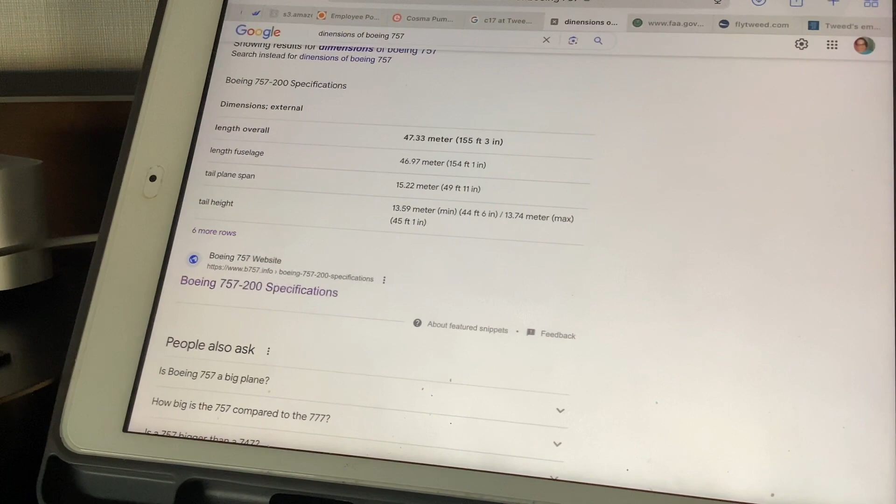And here are some basic numbers on a 757. Interestingly, the length of the airplane fuselage is similar to the length of the wingspan. They're in the neighborhood. I'll also say I'm using approximate numbers when we're talking airplanes because, frankly, there are many versions or variants of a given aircraft. And while it is intricately important in this discussion, overall, we're not making decisions today.

I'm not in charge of the airport. So talking in general terms, ballpark terms, is going to be the mantra of the day. So a 757 is clearly a big airplane, not just by its dimensions, but by its weight. And that weight for that given airplane is 220,000 pounds.

Something to keep in mind, a maximum certified weight of an airplane is just that. It does not mean that the airplane is always operating at that given weight. It means that it is certified to operate to that weight. So something very important right off the bat early in this discussion is the actual weight of the airplane at any given time. And that weight makes a determination in the aircraft performance, particularly from a runway standpoint.

But it will be important when we talk about airport design standards as weight of the airplane, not a determining factor, but an important factor and one to consider, but again, not a mandatory factor when talking about airport design, airport facilities, infrastructure, if you will. So again, the point is you have a 757 airplane that weighs potentially 220,000 pounds.

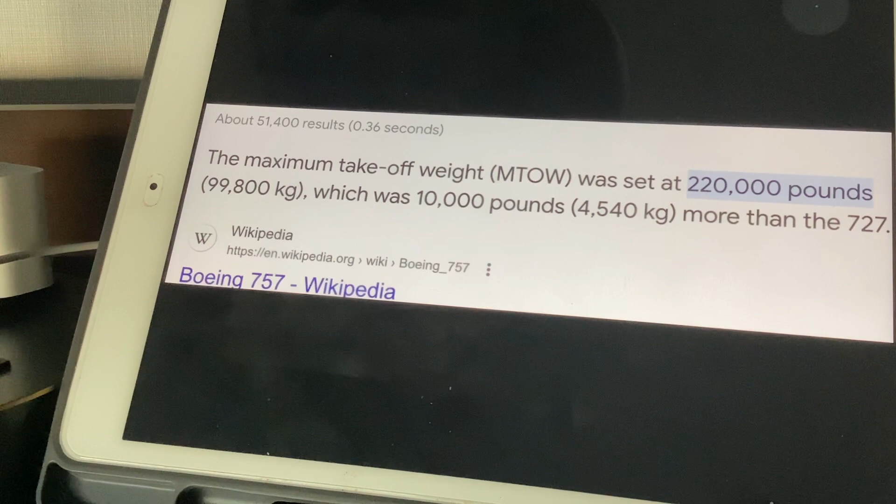One might ask, isn't that too heavy for the airport? Isn't it too heavy for the runway or the taxiways? Well, needless to say, it was there and nothing bad happened, so that's one indication. But we'll verify that with actual data and literature that I'll share in a moment. The C-17, here are the dimensions: 169-foot wingspan, 174 feet long. It clearly is a bigger airplane than the 757.

And the C-17 is certified, again, I'm just doing a general search, I'm not using the actual airplane flight manuals. It's certified to 585,000 pounds. Does that mean that's how much it weighed when it was at Tweed, for example? No, it doesn't. It's mission specific. It depends on what the airplane is carrying in terms of payload, passengers, cargo, and the large or lion's share of weight for an airplane is fuel.

And if an airplane is doing a short flight as opposed to long flight, it is generally going to be carrying less fuel, and therefore it will weigh substantially less than its maximum certified takeoff weight. So purely because we see numbers that indicate a maximum authorized takeoff weight does not mean the airplane was over the weight of a given parameter. We don't know what the weight of the airplane was. The crew does. Sometimes, and we'll talk about the circumstances, the airport operator will know about those things.

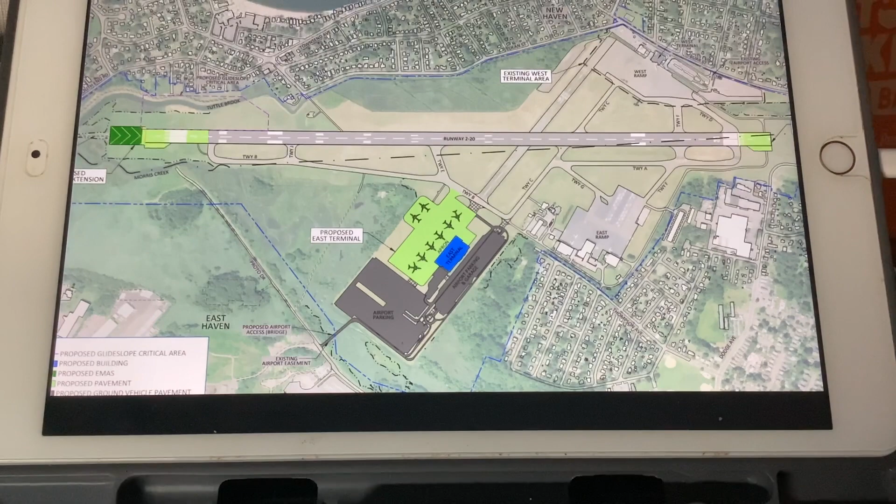But it also represents, essentially, what a pilot sees on his or her airport maps. Just note that you could come across different maps, different layout presentations, but the basic picture remains. There's going to be different information depending on who the audience is. In general you can assume this is what the airport looks like currently — well actually, this is a future rendition — but what engineers see is generally what pilots see for their documents, though often there are many differences.

But again, I just wanted to point out in the discussion about the geometry of the airport: clearly you see a runway, clearly you see taxiways. This is the runway, of course. And then you see, again, the geometry of the airport — that is, the angles of the given taxiways in reference to one another.

This happens to be taken from the Tweed New Haven Airport Master Plan. It's a rendition of the airport layout, and something that's very important: the ALP, or airport layout plan, is approved and reviewed by the FAA itself, the Federal Aviation Administration. It is not something simply produced by the airport.

It has to be approved by the FAA after the airport produces it, so the FAA will review what becomes known as the critical aircraft for that airport. They have specialists, airport planners, people who specialize in exactly this area of expertise, and they will approve or disapprove the airport layout for a given airport for a given critical aircraft.

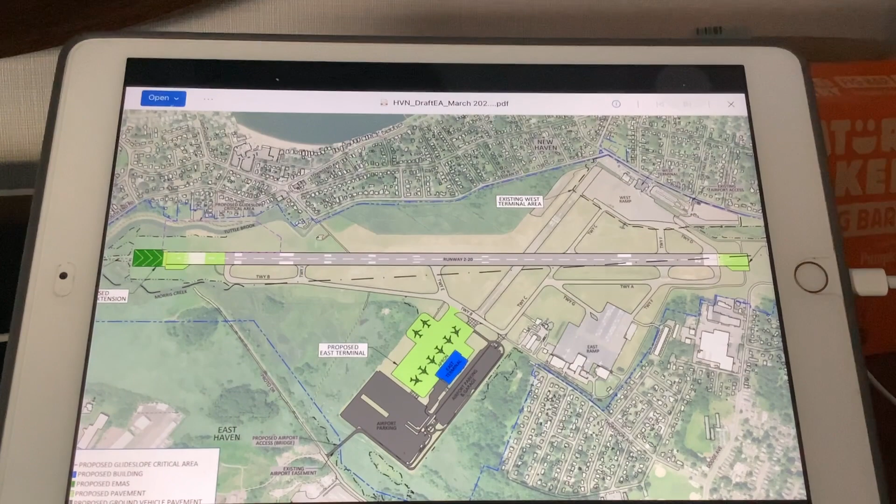The critical aircraft, which we'll define exactly in a moment, can simply be thought of as the most demanding aircraft expected to exceed 500 operations per year at a given airport. Simply, yes, you can say it's the biggest airplane you might see there, but not necessarily if we want to get technical. Overall, in the case of the critical aircraft for Tweed, defined as 500 or more operations per year, we are absolutely honing in on the Boeing 737.

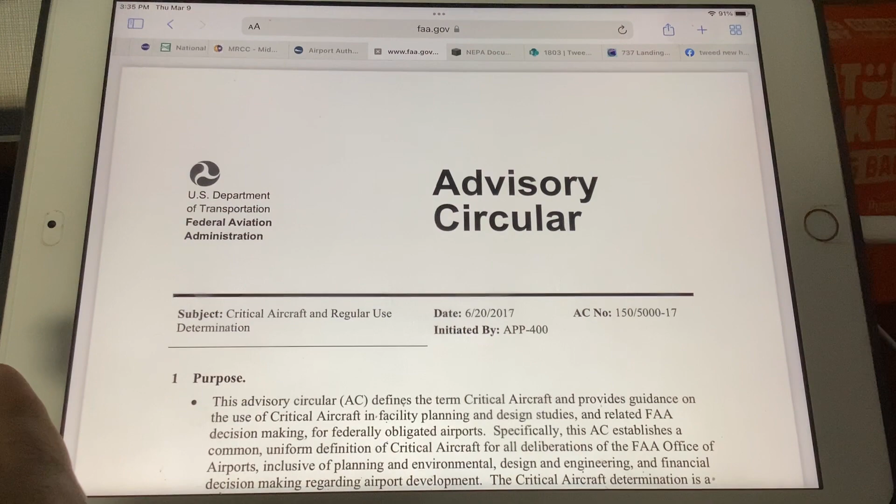So this airport layout has been reviewed and approved by the FAA. A document of great importance is Advisory Circular 150/5000-17, Critical Aircraft and Regular Use Determination. This is exactly the area we just discussed, and it's the document given consideration by the FAA, as it explains the process, part of what we're going to talk about. I will not reference much more than this document other than to say it can be found at faa.gov, and it is of great importance when one makes the statement, this airport was not meant to serve this size of aircraft. This is one of the guiding documents that answers that exact statement.

Critical aircraft and regular use determination. An additional document of great importance and relevance that once again addresses the statement that an airplane is too big for this airport, or that's the wrong airplane for the wrong runway, is document 150-5300-13 Bravo, Airport Design. Again, this is the document one would reference when making such statements or asking such questions.

And we'll ask questions. Is this airplane too big for this airport? This is where we find one of the many answers.

So getting on to definitions from these various documents, what is the purpose for making critical aircraft determinations? I'll paraphrase somewhat. It is an important aspect of airport planning and design for federally obligated airports. That means airports that receive money. It comes with a price. You follow our standards. Tweed is one of those airports.

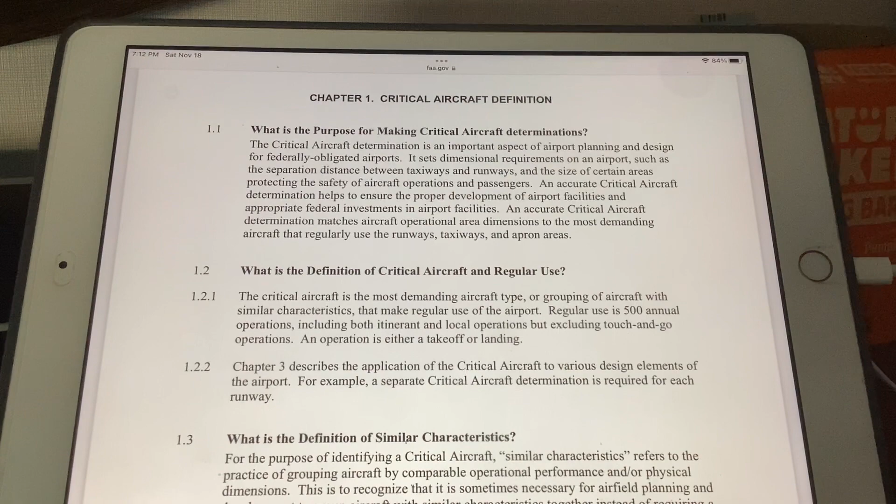Critical aircraft determination sets dimensional requirements on an airport, such as the separation distance between taxiways and runways, and the size of certain areas protecting the safety of aircraft operations and passengers. An accurate critical aircraft determination helps to ensure the proper development of airport facilities and appropriate federal investments in airport facilities. I'll also add, it does not just promote development, but it promotes the maintaining of these airport facilities.

An accurate critical aircraft determination matches aircraft operational area dimensions to the most demanding aircraft that regularly use the runways, taxiways, and apron areas. So yes, runways are important, taxiways are important, apron areas too, and we're going to talk about the interrelationship between all of them. These are things reviewed and under the purview of the FAA.

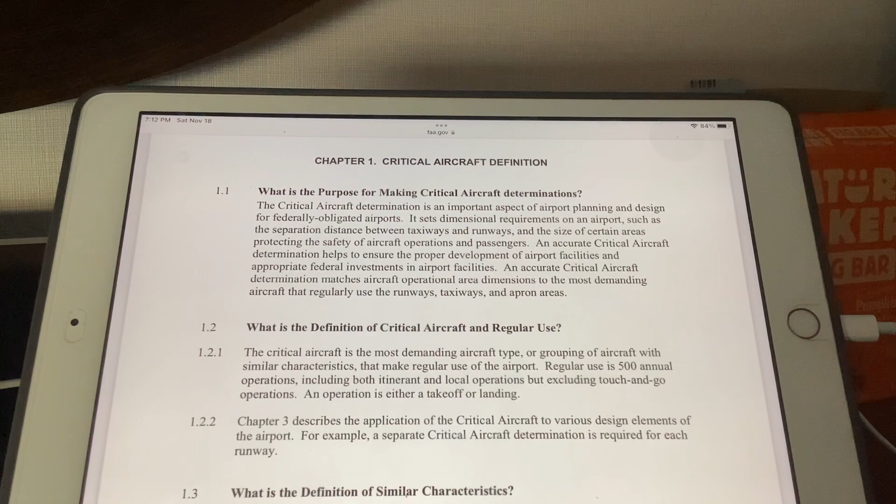What is the definition of a critical aircraft and regular use? Most demanding aircraft type or grouping with similar characteristics that make regular use of the airport. Regular use is 500 annual operations. I'll spare you the rest of the technical details, but an operation is either a takeoff or landing. And when we talk about air traffic control operations, that's an important number. For now, no need to explain touch and goes and things of that nature.

So we're using 500 annual operations of the aircraft as the benchmark. Anything under that, you could actually have an aircraft larger than is appropriate, for lack of a better statement. And you're protected by common sense and operational procedures of the crew, but simply you're statistically avoiding a range of circumstances that 500 or more would actually protect you from. So a way to think about that is combinations of aircraft. How many aircraft of a critical size could you have on the airport and still be within safety margins?

If you had an A380 land at Tweed New Haven Airport, it would actually, besides being very attention-getting, would be okay, because it happens very infrequently. And while the airport does not meet the standards for that airplane on a regular basis, it does in many other ways, and there are permissions granted for such things. That's the case of the 757s and the C-17s. But in this case, we're talking about regular use by a particular aircraft, and clearly 737s and A320s meet that benchmark.

Does the FAA's Office of Airports approve the critical aircraft determination?

Well, to answer this question is almost to end the discussion. We have a certain component of the public making statements that are unfounded, untrue, unsubstantiated, and frankly malicious, and they endanger the public, when in fact the regulating authority, the FAA—not saying they're perfect, by the way—but they are the ones in charge. They're in charge of this. They approve by what I'm about to read.

The answer is yes. ARP, that's a designation for the FAA's airport office, typically the ADO—again, another abbreviation for an FAA person or authority—will approve both the existing and future critical aircraft determination for an airport as submitted by the airport sponsor. During the planning process, this is normally done during the FAA's review of the forecast and documented in the forecast approval letter.

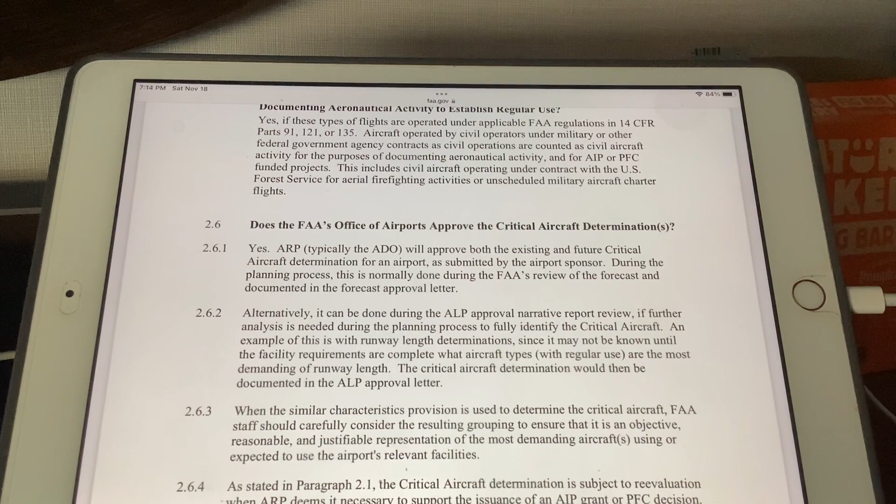I won't read the rest of this, but this is a very easy way of saying this isn't my word, this isn't the word of others, this is the word of the FAA. And while they are imperfect, they're the ones in charge, they're the ones with the authority and the expert knowledge to make these determinations. For this airport, Tweed New Haven Airport, to be functioning and regularly handling 737-700 and 800 aircraft, this beyond a shadow of a doubt says everything we're going to talk about has already been approved by the FAA, and it really isn't necessary. But in the interest of communicating and sharing information, we're going to.

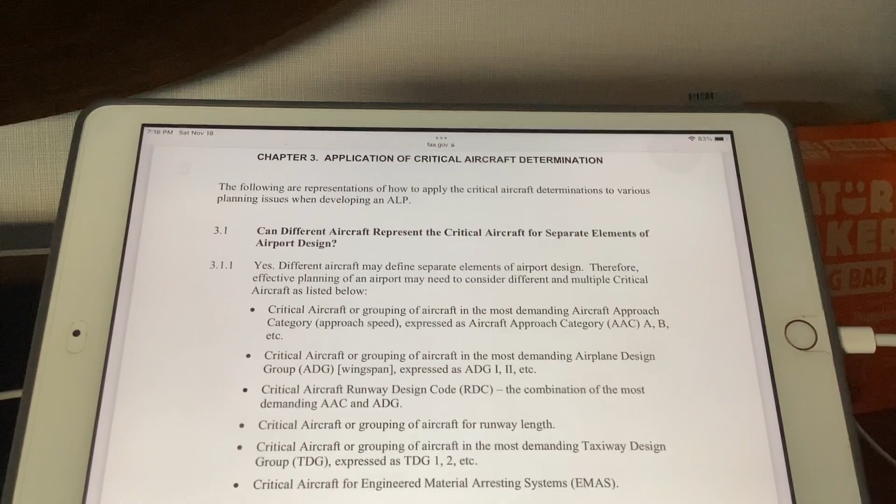Can different aircraft represent the critical aircraft for separate elements of airport design? What that's addressing is that certain parts of every airport may in fact not be suitable for a given aircraft. The reality is almost every airport has some variation of limitations imposed, and those limitations exist because certain segments of the airport are not sufficient for a given aircraft.

So I'll say that again, that's pretty impactful. Number one, this applies to countless airports that we all fly in and out of on a regular basis. Certain aspects of those airports are not suitable for the critical aircraft. Take any airline hub, for example—not using an exact case, just a general example—take Charlotte Douglas Airport, home to American Airlines. Obviously, the critical aircraft there is going to be something bigger than a 737.

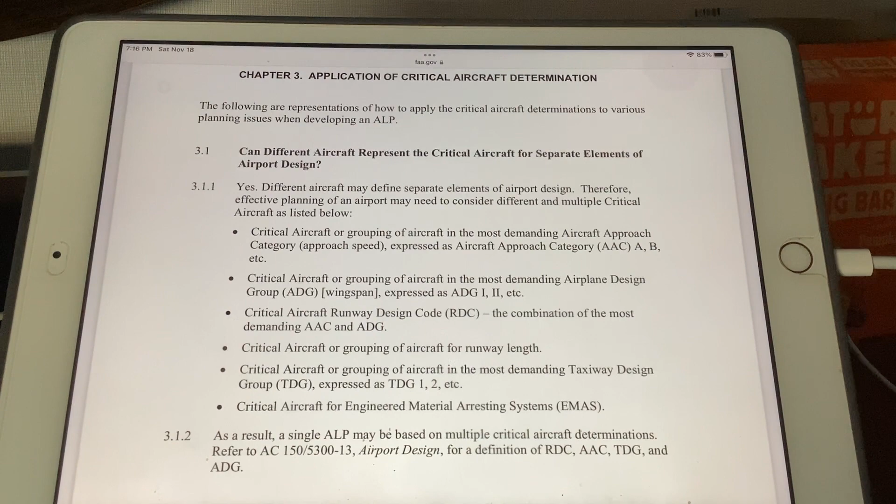It may in fact be the A330 series, or the 350, or 767 aircraft. Without looking at the proper literature, you may find—it wouldn't be a surprise—that certain areas of that airport have restrictions of use for the biggest airplane. I'll talk specifically about Tweed in a little bit about that very issue. That is not rare, it is common. As to why, that's a subject for another discussion. But it's common, it's known, and it's accommodated through proper amended procedures and other ways of doing business, if you will.

So that is a very broad discussion stating that certain elements of an airport may in fact not be suitable for a given aircraft, and there are ways to address that.

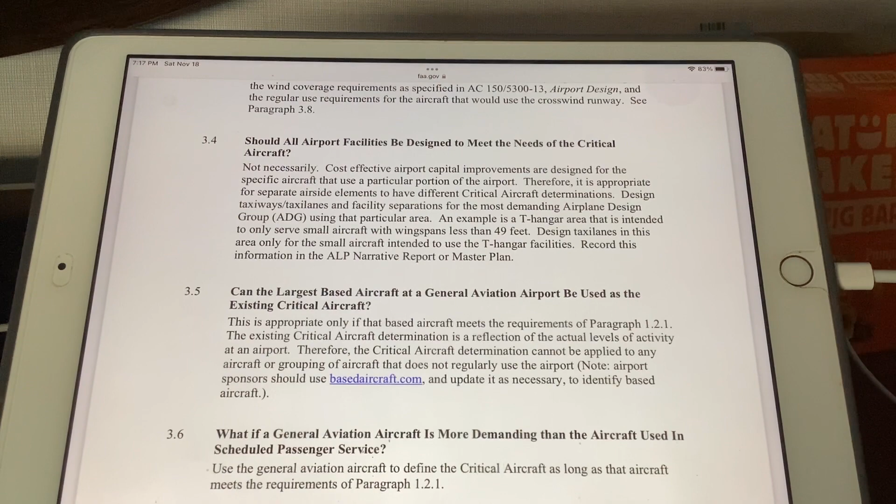Speaking of which, the next question—again, this is the FAA literature itself. For them to be asking these questions in a generalized document, not specific to Tweed but appropriate generally, must mean there are other conditions throughout the country that exist just as they do at Tweed. Should all airport facilities be designed to meet the needs of the critical aircraft?

Not necessarily. Cost-effective capital improvements are designed for the specific aircraft that use a particular portion of the airport. Therefore, it is appropriate for separate airside elements to have different critical aircraft determinations. Design taxiways, taxi lanes, and facility separations for the most demanding airplane design group using that particular area. I'm not going to read the rest of what they have.

I'll tell you—the east side of Tweed New Haven Airport, for example, has components, particularly the east ramp and what's called a taxi lane. There are limitations, though not many, and in fact you've actually seen 737s over there. But just by example, that side of the airport is not necessarily required to meet the critical design standards for a given aircraft. Does it? Yes, but with some limitations.

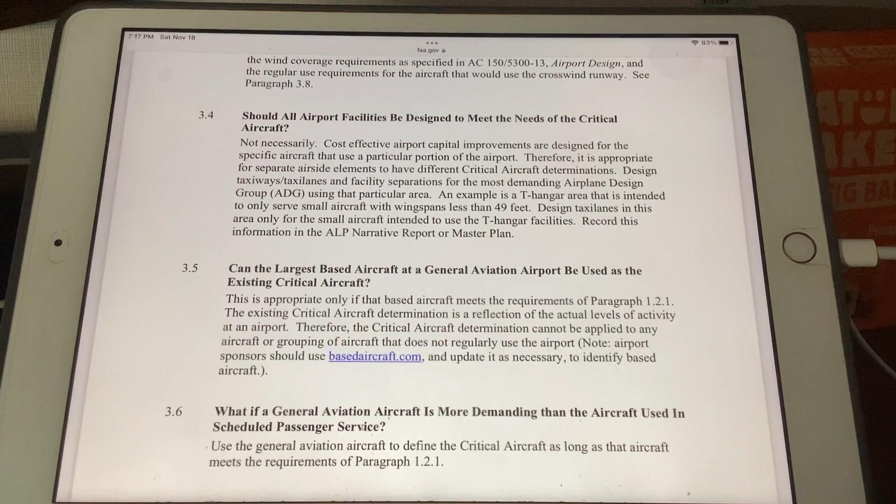So there's always a catch, there's always a caveat. It's a way of saying be careful if you wanted to generalize it, but there are issues with aircraft movement under their own power versus being towed, etc. But suffice it to say, an entire airport does not actually have to meet the standards for the critical aircraft. I'll say that again: the entirety of a given airport does not necessarily have to meet all the design standards for the critical aircraft. That's not my words, that's the words of the FAA. Does that mean that's necessarily the ultimate goal or will persist? No, but it means exactly what I stated.

Here's another important one, question 3.9. Should a critical aircraft determination be made for pavement strength design? Some in the airport opposition community tout runway weight-bearing capacity, and I'll get into that discussion in depth, but the simple answer is no.

The pavement standards don't have to meet the criteria for a critical aircraft. The methodology for designing pavements is different. Refer to the Advisory Circular entitled Airport Pavement Design and Evaluation. FAA pavement design considers the damage to the pavement from each individual aircraft in the traffic mixture. The final pavement thickness is based on the cumulative damage of all aircraft.

The important takeaway is that weight-bearing limitation is not something one should ignore. One should absolutely take it into consideration, but it is not a glaring safety oversight, very simply. I'm going to show you numbers and parameters that show Tweed New Haven Airport meets the standards for the given aircraft. I'll explain some technical details, but the bottom line is it does meet the standards, and I'll show you the numbers in a moment.

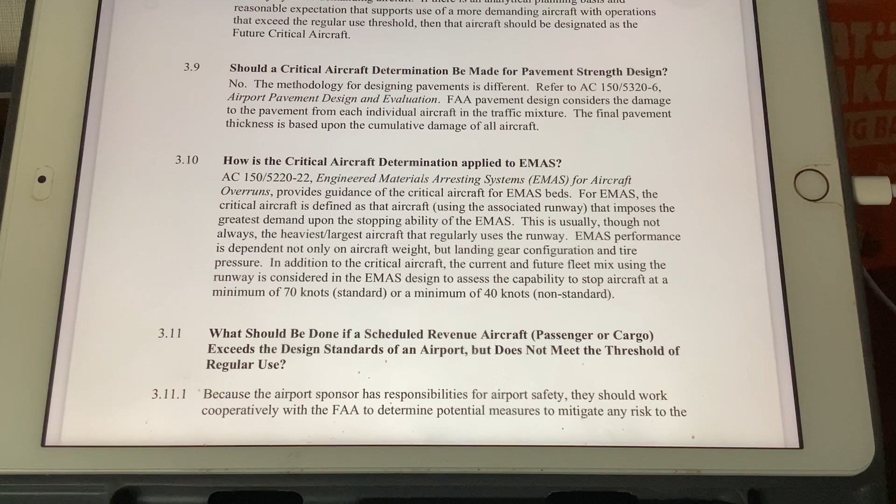If anyone were interested, the FAA's own literature says that weight-bearing capacity of a runway is actually not a limitation on the airport when determining critical aircraft.

We're almost done with these. How is the critical aircraft determination applied to runway length? Evaluate each runway separately at an airport. Choose the single aircraft or grouping of aircraft with similar operational requirements that have the longest runway length requirement and make regular use of the runway. In some cases, the critical aircraft for runway length may be different from the critical aircraft that establishes the most demanding runway design code for the runway.

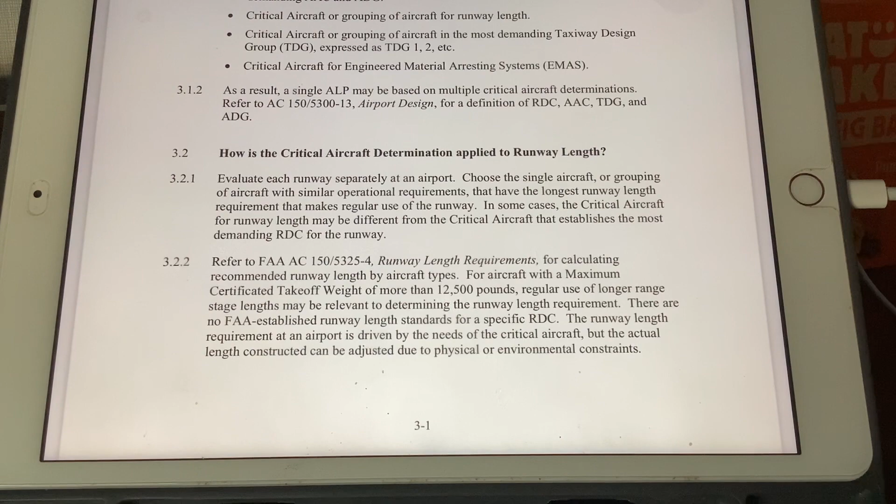Runway performance is a subject unto itself. I'll touch on it as I have in the past, but it deserves its own subject. At this point, runway performance is based on a number of factors for an airplane. It is not a static number, and I'll get more in depth on that. So runway length is not a determinant; aircraft performance is. Aircraft performance varies throughout different parameters and conditions.

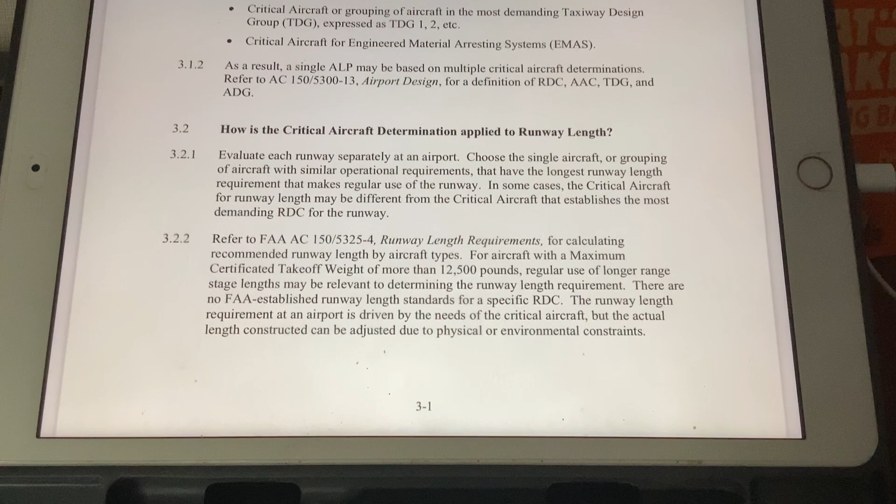An airplane could operate from a shorter runway depending on its mission, as opposed to a different day when it's doing a longer mission. Shorter missions typically equate to less fuel and less weight, whereas longer missions mean differently, so the parameters of aircraft performance are different. There's no static number past or below which it is unilaterally acceptable. You could operate a 767 from a 6,000-foot runway depending on the mission and the conditions in which it's operating. So you cannot use runway length as a static number, as many airport opponents like to do. I'll show you why, because they make performance charts for that very reason.

The airport layout plan, in the words of the FAA itself, is a graphic representation of existing facilities and proposed development plans for an airport. Airports that receive certain types of federal assistance accept a grant assurance that obligates them to maintain the current ALP. This tells you that this is a very important component to the particular airport.

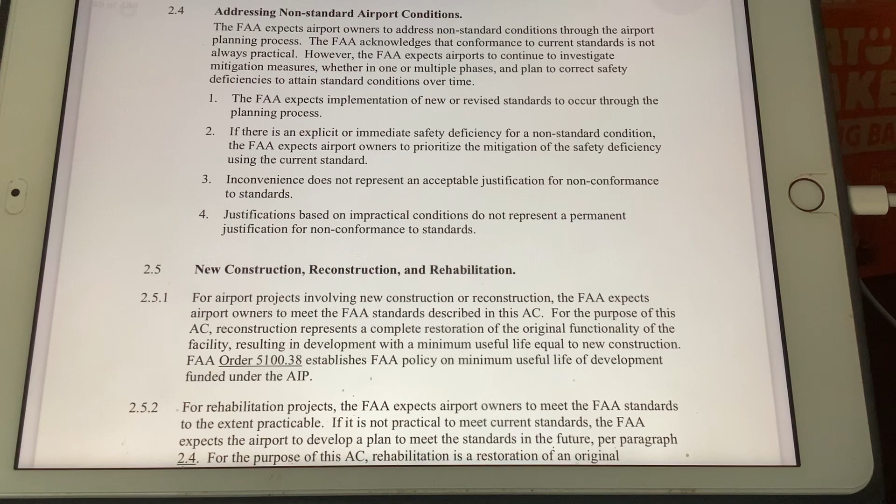I'll just see if there's anything of pertinence there. Then addressing non-standard airport conditions. I'm going to take a moment, let you look that over. Leave it here—you see everything that I thought was pertinent. This basically allows time to comply, and circumstances if compliance is not appropriate or could occur. But I'll leave it at that for a moment and let you just read this.

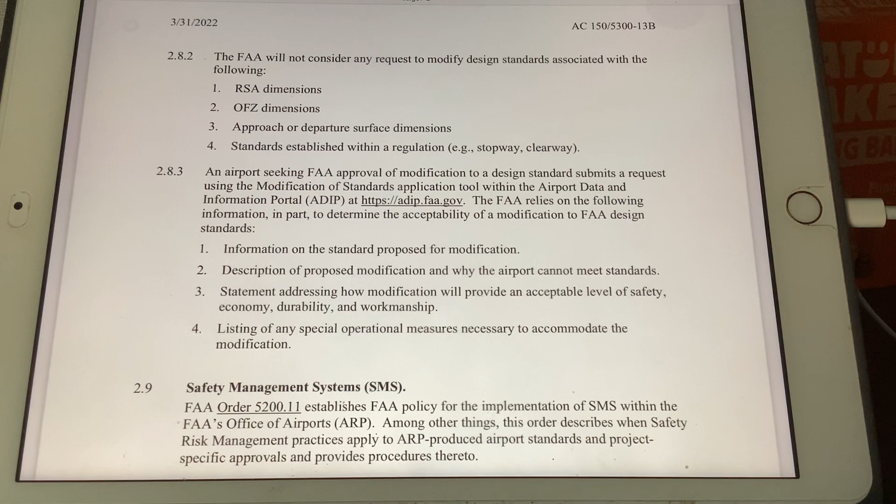So I have RSA dimensions, OFZ dimensions, approach or departure surface dimensions, and then stopways and clearways. This pertains to the slides we just read, but it allows modifications to the standards in the object-free areas, as we generally refer to them. An object-free area you could think of as a buffer area adjacent to the surface the aircraft is using, whether that's a runway or a taxiway.

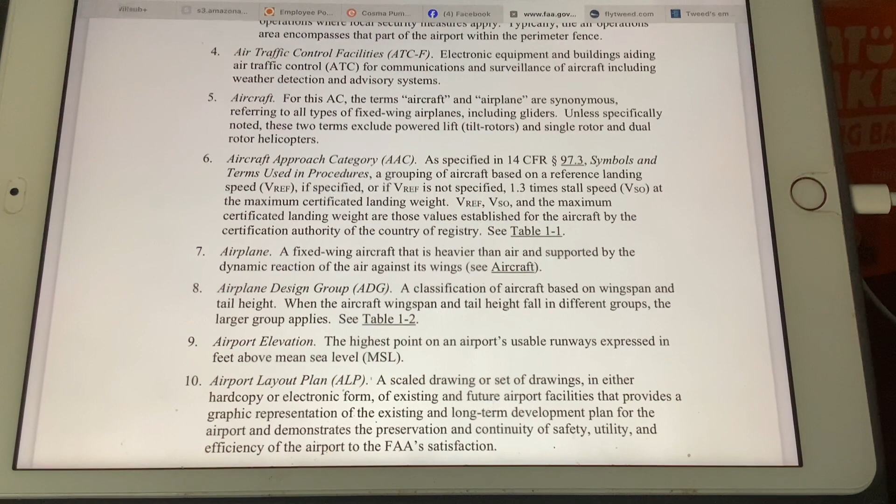We're almost done with the dry definitions, I promise. What we're going to get into is aircraft approach category and airplane design group. We've already talked about the airport layout plan, or ALP, but in this case we're going to hone in on the AAC and the ADG. Verbatim, the ADG, aircraft or airplane design group, is a classification of aircraft based on wingspan and tail height. I'll leave it at that. And aircraft approach category is the speed at which an airplane performs its landing approach when it's configured for landing. That's going to come into play here.

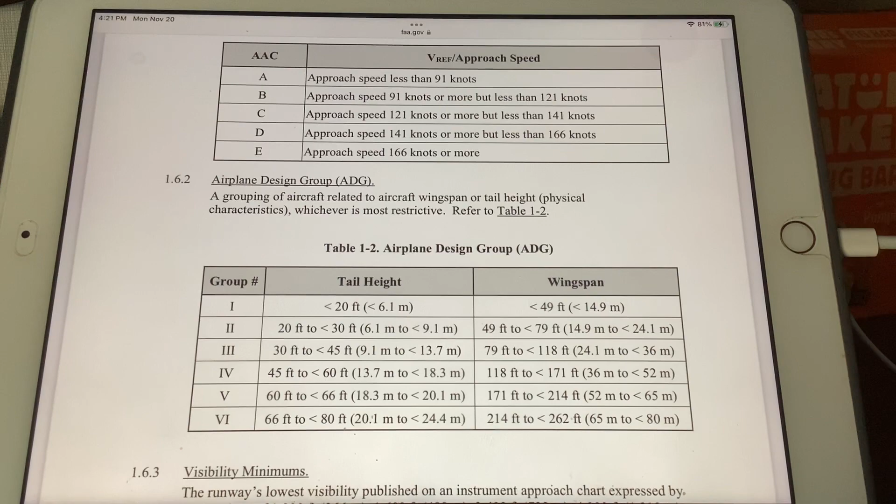Take my word for it, I'm experienced, authorized, and qualified to tell you that a 737, or the aircraft type that I fly, we utilize category C. So we're making our approach speeds between 121 and 141 knots. Those are typical speeds. Sometimes we might be in a different category based on certain conditions, but I'll spare you that discussion. 99% of the time, the 737, the Embraer 190, that category of airplane, an A319, are considered approach category C, C as in Charlie.

And further, we are all considered in a happy family of airplane design group 3. I'm not so concerned with tail height, we'll leave that out of the discussion, but the wingspan is 79 to less than 118 feet. I'm going to show you the specifications, the general numbers, for the airplanes.

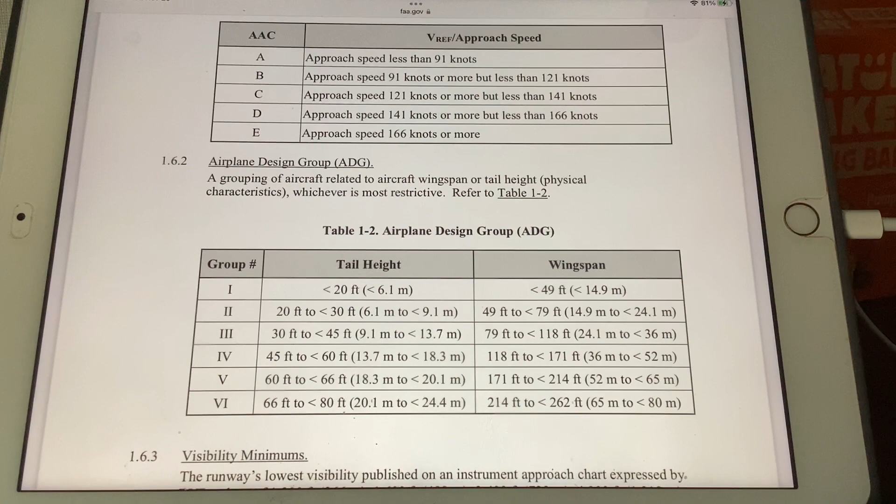Therefore, when it comes to the runway design group, we consider airplane approach category and airplane design group in order to get a runway design code, an RDC. So for now, we are C3. I'll add, and you can take my word for it, they add a 4-digit number which pertains to visibility. I'm going to spare us that right now, I'll show you on an approach chart where I'm getting that number. But as I said, the RDC, the runway design code, is a 3-component code sharing the AAC, ADG, and the approach visibility minimums, which establishes the design characteristics for a particular runway.

So I'm going to show you an actual chart that we use to land in poor weather conditions at Tweed, that shows we are appropriate for the given aircraft. Again, don't worry about the 1200 number, that pertains to visibility. And just like magic, there's the chart.

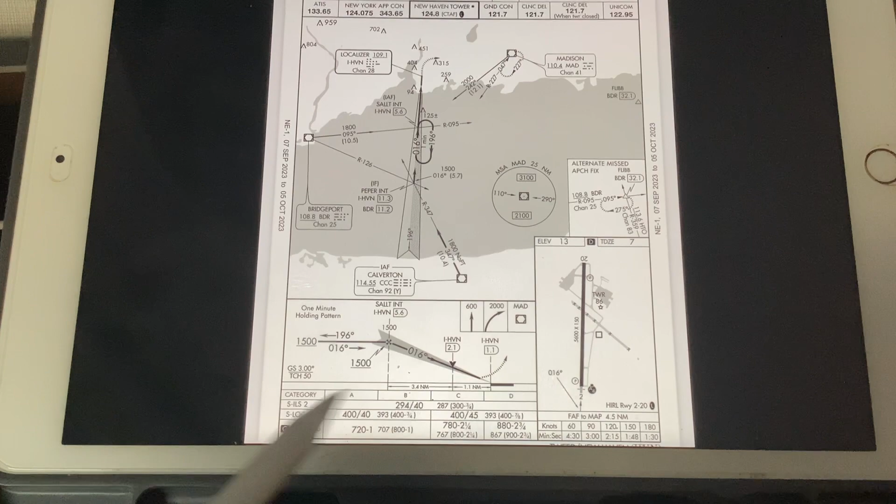If you focus on one area, I'm not going to teach you how to read this whole chart, it's not necessary. We have category A, B, C, and D. That's simply a way of saying if you're flying an airplane at a given speed, which pilots know - this is our aircraft, this is what we're trained for, this is what we have manuals for - we are category C. The way this chart works, since it's uniform across A through D, A being the slowest airplane, D being the fastest, means this approach, and the other approach Tweed has coming in from the north, will be the same way. It's approved for all categories of aircraft, any speed. In fact, if you wanted to fly a MiG-29 on this approach, you'd be allowed to, based on these minimums.

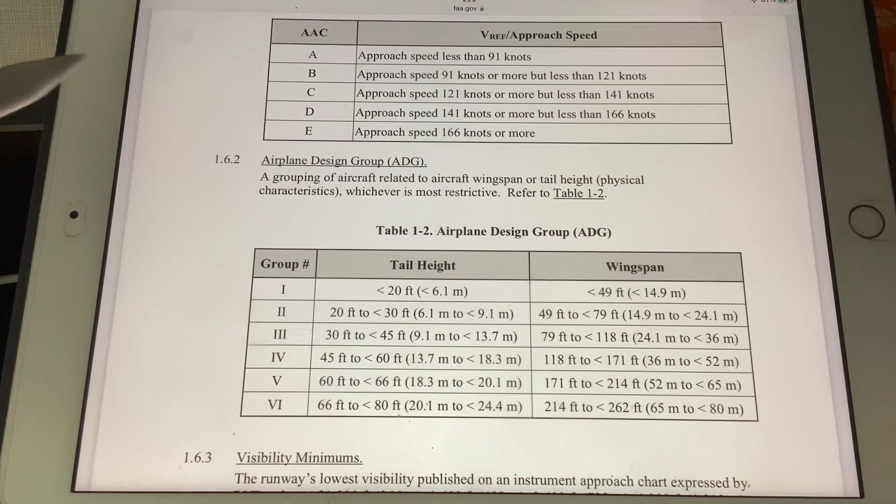So, looking at the instrument landing system for runway 2 as it applies to approach speed, which also factors in visibility and wingspan, but I'm keeping that element out right now - very simply, we have published minimums for a given approach category, which references the runway design code and the AAC. Again, this is listed on the ALP, the airport layout plan, and it's a fact that Tweed is listed as a C3. We're going to look at the wingspan in a minute.

But I know the 737 approach speeds, I know the approach speeds on the airplane that I fly. This is fact, this is not conjecture, this is not my opinion. I am legally allowed to conduct the approach to this runway based on what I just told you. And of course, I know the wingspan of my airplane, which this is not - this first references the 737-300, which came into New Haven on United Airlines.

737-500, United Airlines. They operated those two models from Tweed. We have the 737-700. Honing in, interestingly, the wingspan of the airplane is 117 feet, 5 inches. Magically, that fits in the 118-foot limitation. And these are also the wingleted versions. So again, this is a model 700W or BBJ.

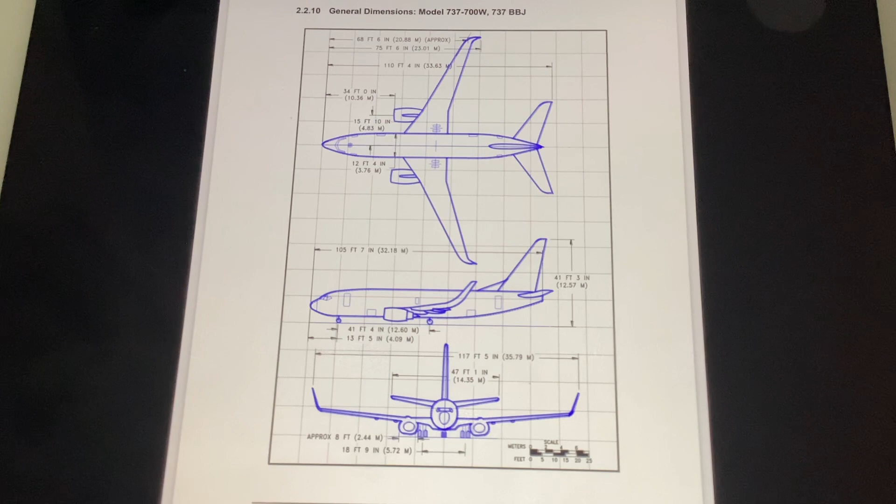Take my word for it. We're not talking huge difference, if there is even a difference. This may not be the exact version. That said, it's a 737-700, and it's a great approximation. I may come back to this, but if you can memorize these points or these dimensions, because they are important for a later discussion. But for now, remember 118 feet is our limit, and we're at 117 feet 5 inches for the 700. And interestingly, the 737-800 has the same wingspan.

So by definition, the words and literature of the FAA itself, first, you can take my word on the approach category. I don't have a manual with me right now. I have my own experience doing this, that our approach categories are Category C. We fly a range of speeds based on weight and other conditions, and the wingspan is always the same. So by that definition, the AAC and ADG, the Boeing 737 is a C3 category aircraft, and interestingly, that's already been approved by the FAA on the airport layout plan.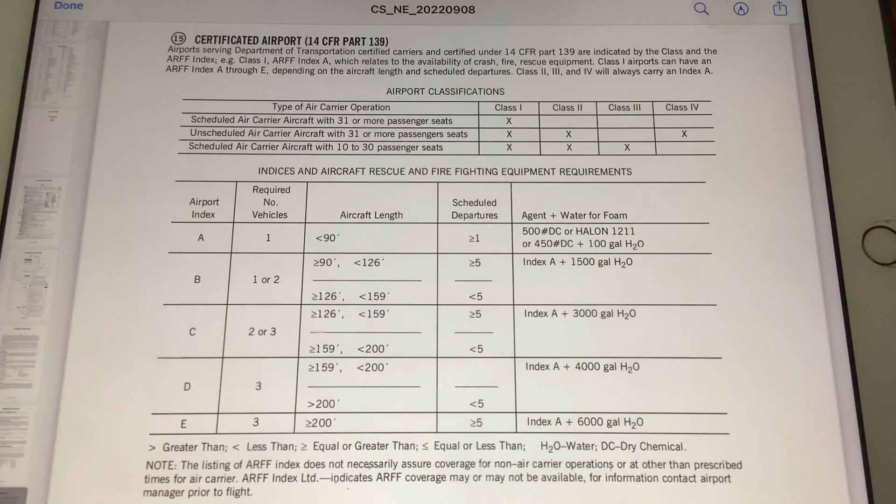Take a deep breath. That was the easy one. The second easy one is aircraft firefighting indexing. Indexing is a way to refer to the number of fire apparatus or rescue apparatus at an airport in addition to other requirements. This is taken from CFR 14, Part 139, and I'm responding once again, not just to the malevolent, malicious, and misinformation spread by certain individuals that Tweed has no fire protection, but this is a measure indicating the appropriateness of the 737-700 and 800 airplane serving Tweed New Haven Airport. It's allowed because Tweed New Haven Airport is an Index B and is capable of Index C.

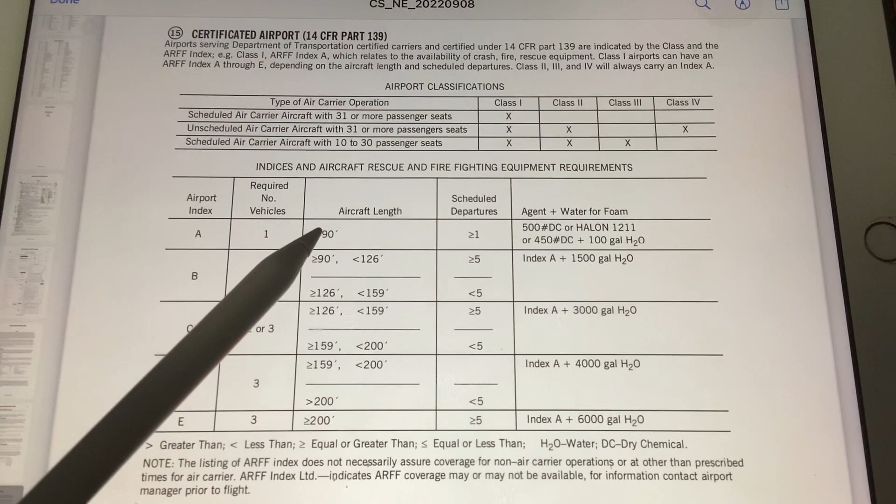I'll let you look at this chart. Of interest is the aircraft length. The 737-700 is between 90 and 126 feet. The 800 is a little bit more than 126 feet. In fact, it's 9 inches longer. The determination is not just the length of the fuselage, but the number of operations, average daily operations. I'm not going to belabor this point, but very simply, the number of operations per day and the average then becomes the determinant for the index.

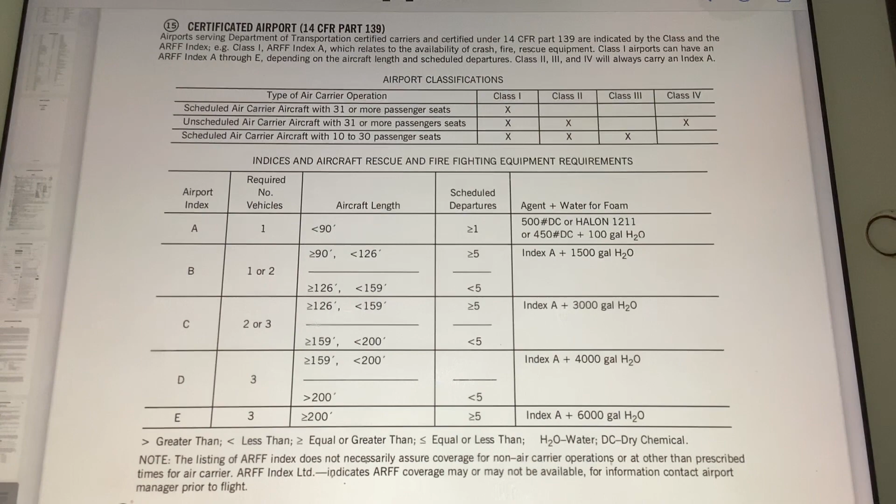Tweed New Haven Airport currently meets Index B, and they are flexible, like many airports are, to meet Index C with proper notification. It's a simple phone call, if you will, from the operations staff of the airline to the staff of the airport. Not going to get into that process because it's none of my business, nor is it my area of expertise, but I know that it happens, and I know the literature that indicates the index for a given airport, so that I know that my own aircraft is appropriate for a given airport.

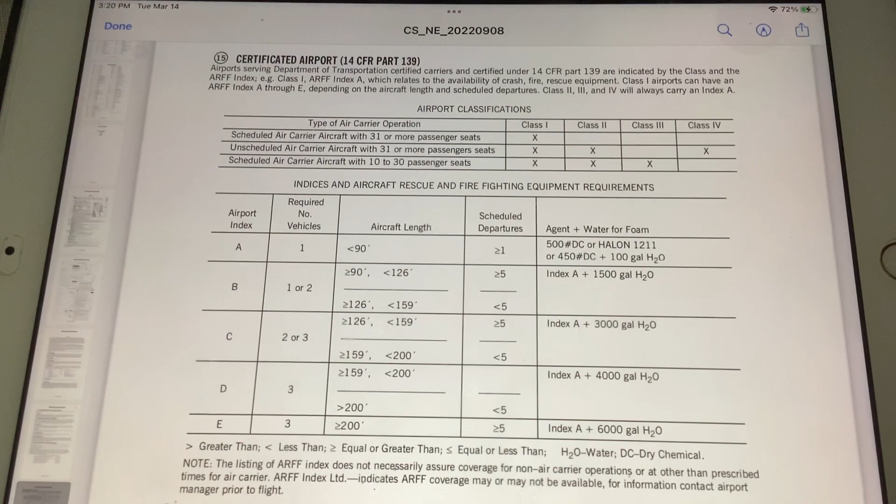My aircraft and the 737 would not be appropriate if the airport met Index A. They have to meet Index B, and then the criteria for Index B would be the number of departures of the larger airplane, the average number. So if you notice, the 737-800 continues to come into Tweed. They don't meet Index C currently because the average number of daily departures is less than 5. When it goes above 5, they will meet Index C, and that will be the end of that. So Tweed is either an Index B or C airport. I'll let you look at this table and dwell on that issue because it's rather simple.

This is published data. This is not make-believe. For now, I'm not showing you the published literature that pertains specifically to Tweed, which you can find in the Airport Master Record. 5010 is the document. You could also find it in the pilot publication, which this is an excerpt from, which is the chart supplement. Tweed New Haven Airport is indicated to pilots as Index B with the capability of Index C that meets the fuselage length requirements as well as the average number of daily departures, and therefore from a firefighting crash rescue index, Tweed New Haven Airport is the right airport for the right aircraft. I'll say that again.

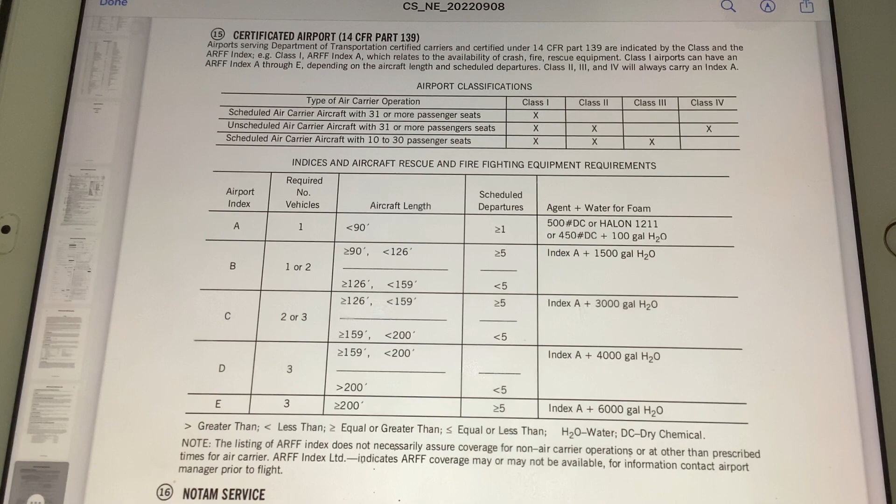Uncontested reality, this is approved. There would be major trouble. The airport meets Index B, which meets the standards of the 737-700 and 800. And then if they up the number of 700 or 800 departures to average 5 or more, they'll be able to meet Category C or Index C. So this is the right airplane for the right runway based on Aircraft Rescue Firefighting Index. So we've now addressed in a very casual setting 2 reasons the airport is the right airport for the right airplane. The 737-800 and 700 are a good match, or a legal match if you want to get technical.

I'll very quickly talk about aircraft performance. We have some prominent airport protesters spewing numbers. It's absolutely misleading, misguided, malevolent, malicious, misinformed. Need I go on? This is a person that grasps very little, or grasps quite a bit and chooses not to share the big picture.

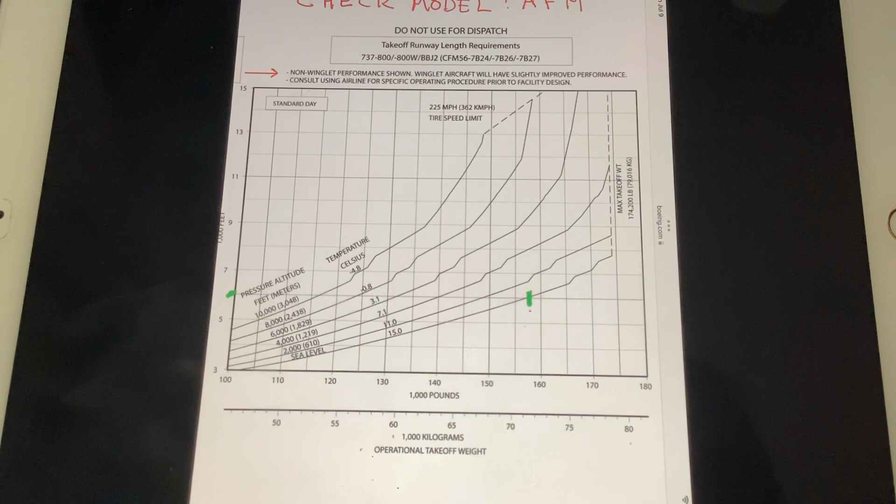This is what I do. This is what pilots do, dispatchers do for a living. This is what aircraft manufacturers specialize in: charts, performance, numbers. It is not as simple as the airport opposition crowd makes it out to be. I'm not going to belabor the point of aircraft performance at this point. Can do that in a separate area again.

But very simply, aircraft performance is a charted phenomena, if you will, that is impacted by numerous factors: weight, weather, pressure, altitude, etc., things we won't talk about, thankfully, today, that makes a static number not the way you refer to aircraft performance. A 737, my airplane, may in fact require, under certain conditions, 12,000 feet of runway.

But those are under very unique or very specific conditions that in fact are pretty rare. They will deal with slippery field conditions, high weights, high temperatures, high pressure altitudes. These are things that are not addressed by these individuals because they are willfully misleading people and, quite frankly, endangering public safety by making these statements.

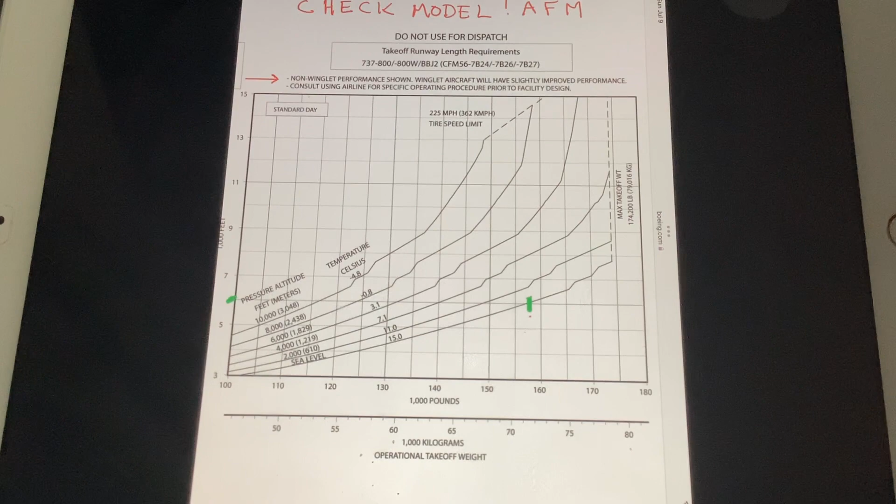They're taking these numbers completely out of context, and I would argue deliberately so, because they are smart. They are smart enough to know what they are doing, which is misleading people and stating very static numbers, snapshot numbers, without the proper explanation. If anyone is ever interested, I'd be happy to explain aircraft performance. My life depends on it, and so too that of the passengers.

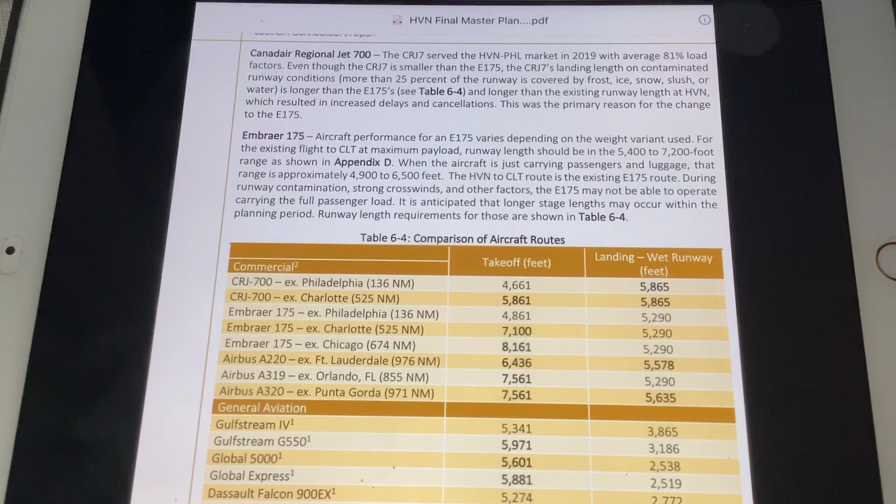This is taken from the Airport Master Plan. This shows, in very generalized terms, runway requirements for select airplanes at the time determined to be the critical. And in this case, you can consider the A319, 320, and even the A220 to be similar critical aircraft to the 737. And you notice there's a range of numbers. I'm not going to get too in depth with that, except to say it exactly proves my point that aircraft performance, when it comes to runway length required, varies throughout a range of conditions.

Let's see if I can repeat that again for impact and importance. Aircraft performance, runway, takeoff, and landing is not a static number. It is a number that varies across a range of circumstances to include weather, weight, altitude of the airport, things that are necessary to be charted and computerized now, because we obviously use a lot of computers as opposed to the manual charts. But regardless, aircraft performance is a non-static number, and it is in fact a characteristic of an airplane that varies across numerous conditions.

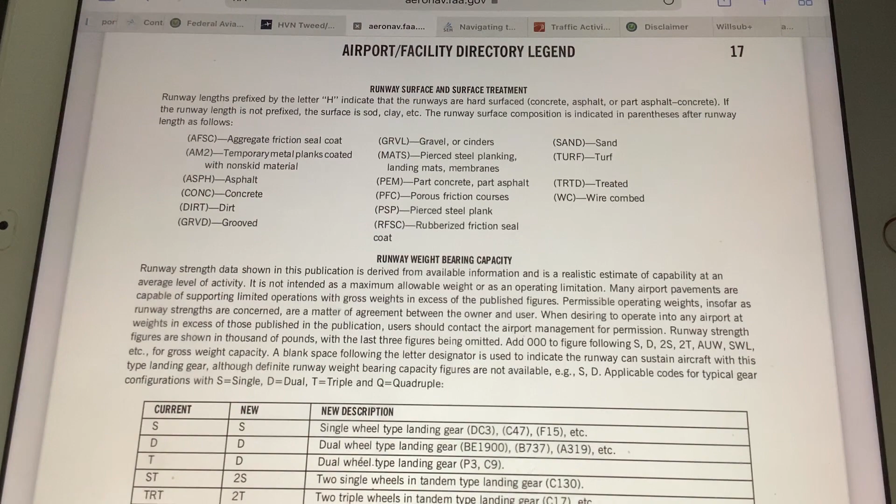Airport Facility Directory Legend. This, again, is still part of the chart supplement. It is a publication meant for pilots, but it brings up an interesting point on the third issue with regards to Tweed New Haven Airport and the wrong runway and the wrong airplane, and that is runway weight bearing capacity. Remember, and this will fortify the statement, runway weight bearing capacity is not viewed by the FAA as a necessary limitation or an absolute limitation to use of an airport. And again, this is exemplified in the statement.

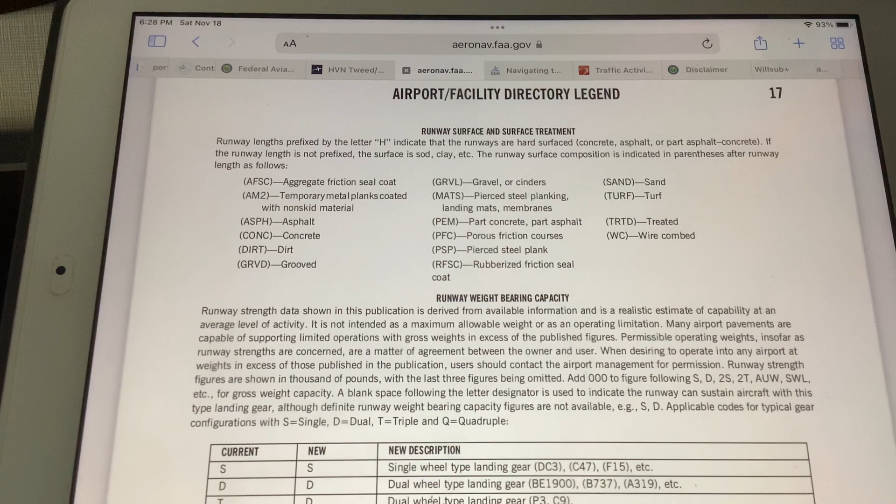Runway strength data shown in this publication is derived from available information and is a realistic estimate of capability at an average level of activity. It is not intended as a maximum allowable weight or as an operating limitation. Many airport pavements are capable of supporting limited operations with gross weights in excess of the published figures. Permissible operating weights, insofar as runway strengths are concerned, are a matter of agreement between the owner and user. I'll leave the rest of the reading to you, and I'll explain in greater detail what we're going to be looking at in a moment.

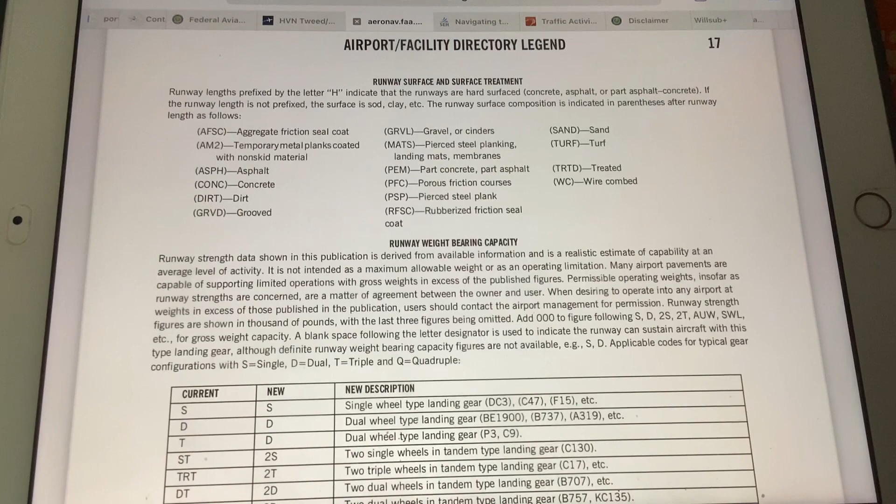The overarching issue here is runway weight bearing capacity is actually not considered a limitation. Should it be considered? Yes, absolutely, and it is. But if you recall, remember, two airplanes come into Tweed. One of them is certified to 585,000 pounds. I don't have to look at charts to know that exceeds the weight-bearing capacity published that we're going to look at for Tweed New Haven Airport. But we're still here today, and it's because of this literature and what we'll discuss in a moment.

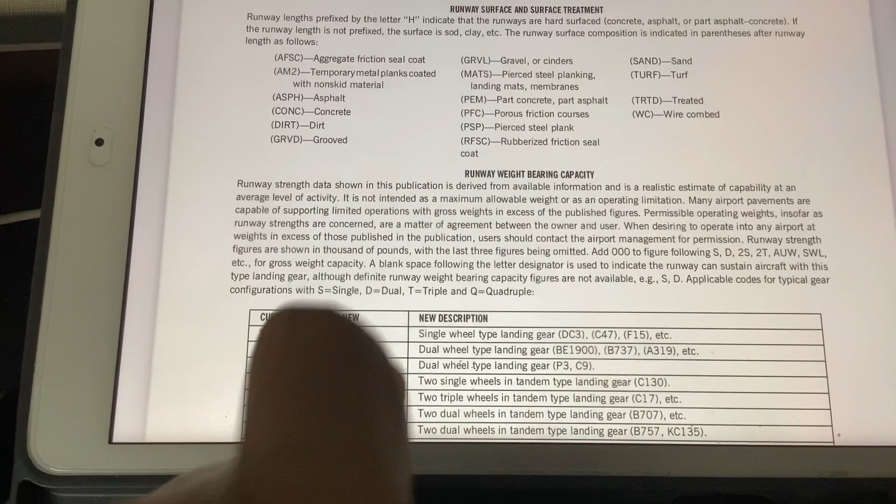This is just a table for wheel configuration. Don't want to get too in-depth with that, but we have 2-wheel configurations, 4-wheel configurations. The 737 is a 2-wheel tandem wheel configuration, which is considered, as I said, D when we look at the chart supplement for Tweed Airport. But there are other considerations, and we're going to look at 2S.

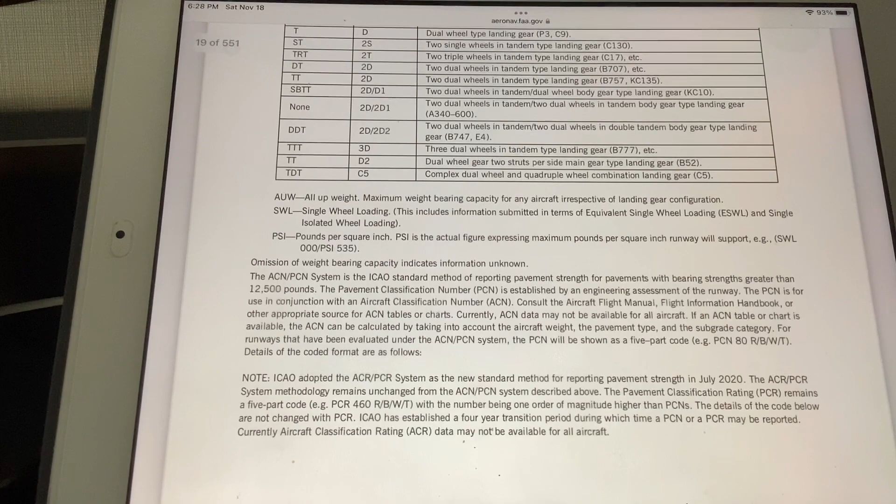Very simply, Tweed is certified to 160,000 pounds for dual type landing gear and 175,000 pounds for 2 single wheels in tandem like a C-130. Now, I don't know if I actually have that in this presentation, but you can take my word, those are the published numbers. So we're using 160,000 and 175,000 for the wheel configuration of a given airplane. So Tweed Airport is actually certified to 175,000 pounds, depending on the wheel configuration, or 160,000, neither of which is an actual limitation based on the literature.

But we have one other criteria that is published and therefore certified, and we meet without a shadow of a doubt, and it doesn't need a discussion other than to say the numbers and leave it at that, and that's called the pavement classification number. The pavement classification number at Tweed is 57 for the record. This can be again found in the airport master record 5010 or in the chart supplement. And that PCN is a pavement classification number. It's an engineering assessment of the runway.

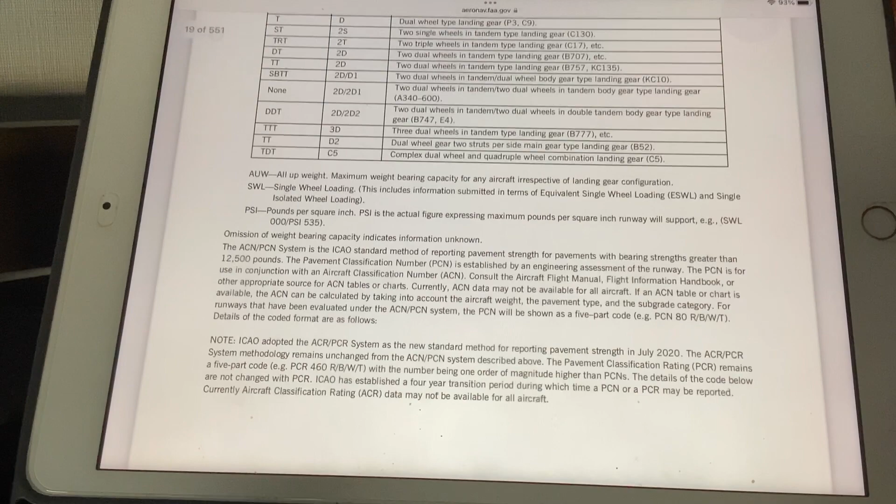It deals with, very simply, without getting into an area that I'm not an expert on by any means, but can understand in general terms, the pavement flexibility and the pavement subgrade. So the PCN is an additional measure of runway weight-bearing capacity, strength, if you will, that considers the pavement rigidity, whether it's flexible or not, and the kinds of asphalt that is used, bituminous, for example, and then its subgrade. They're very fancy ways of saying it's how the runway's constructed. It's not just a simple piece of pavement. It matters the texture, the kind of pavement, and the subgrade. PCN for Tweed Airport is 57.

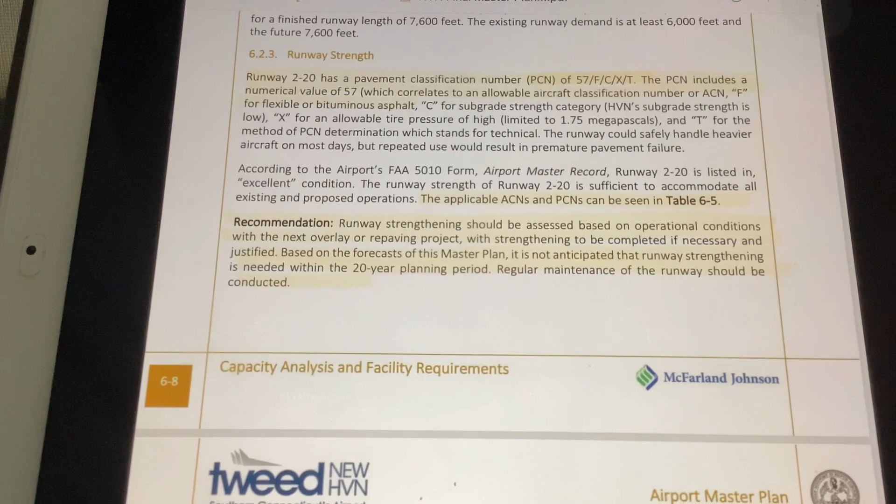And I have the second best document to the 5010 form and the chart supplement, and that's the airport master plan, and it's the catalog of the facilities. It says runway 2-20 has a pavement classification number of 57, F for flexible, C is the subgrade, X and T are not relevant to this discussion. I'll leave them out. It has to deal with tire pressure, not of interest to us essentially.

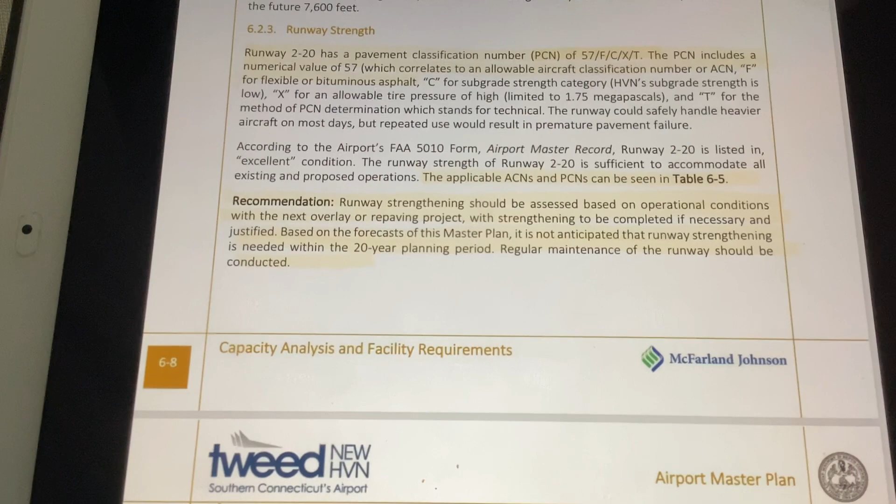The PCN includes a numerical value of 57, which correlates to an allowable aircraft classification number, or ACN, F for flexible or bituminous asphalt, C for subgrade strength category, subgrade strength is low, and X for an allowable tire pressure, etc. So, as I said, the 5010 form talks about the sufficiency of Tweed in terms of, in this case, pavement condition. Very simply, airports have airport maintenance and pavement maintenance, and that's a whole other discussion we're not going to address today.

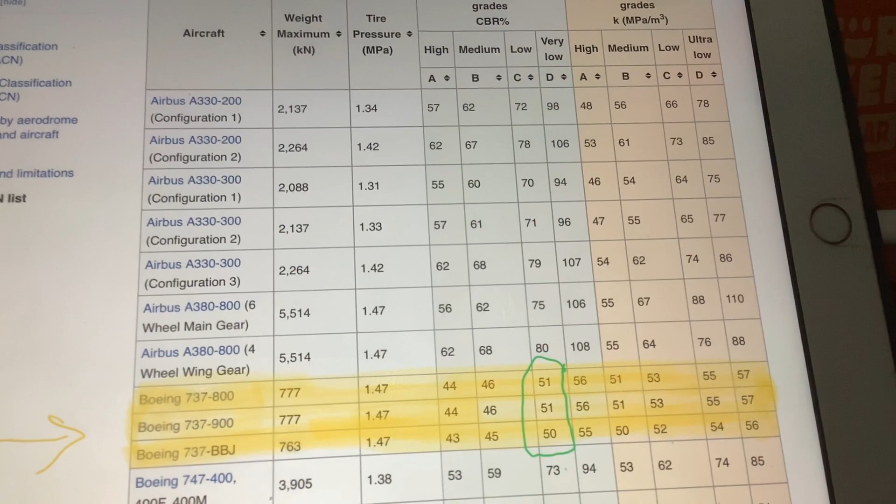But interestingly, I have a table from ICAO, International Civil Aviation Organization, which the FAA, you'd be happy to know, adopts as a guiding document in this particular area. And I have the table, and I have the pavement subgrade and flexible pavement circled. 51 for 737-800, 900s, and BBJ. Now, if we were in court, ladies and gentlemen, maybe I would have to get a more specific document. But since opponents of the airport never seem to produce documentation, and those who do seem to leave out certain documents, here is a reference point. 51 is lower than 57, meaning the PCN, not just the weight-bearing capacity, is sufficient to make this airplane the right airplane for the right runway. So it isn't my word, it's the literature that supports.

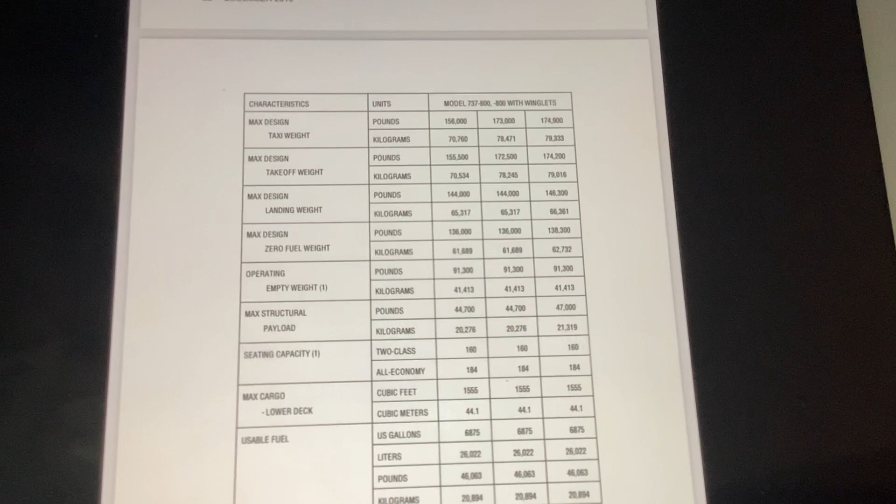Very quickly, and as we finally and maybe mercifully come to the tail end of this presentation, what I have is a table with a range of operating weights for 737, depending on the version. Do you have to remember them? Absolutely not. I don't. That said, in addition to all of this that I just stated, weight-bearing capacity, 160,000 pounds, is not a limitation for the airport and the kind of airplane that it serves. The pavement classification number well meets the standard as published by ICAO for the 737-800 airplane. In addition, as I said, these airplanes are not necessarily operating at their maximum weight for a range of reasons. It depends on the mission.

Where are they going? How much fuel are they required to carry, which is different on the same flight, possibly every day, because of other factors outside this discussion. These are issues that pilots and dispatchers deal with on a regular basis. You fly from New Haven to Palm Beach, and one day the fuel required is one amount, and the next day it is another. Along with the limitations of runway length and performance issues, these airplanes are not even operating at

the maximum weight of the particular airplane. So that's why I said earlier, you can have an airplane that weighs 500,000 pounds, or is certified at that weight. It does not mean it's operating at that weight. It may be operating at a very light weight. That is further why aircraft performance is a variable factor.

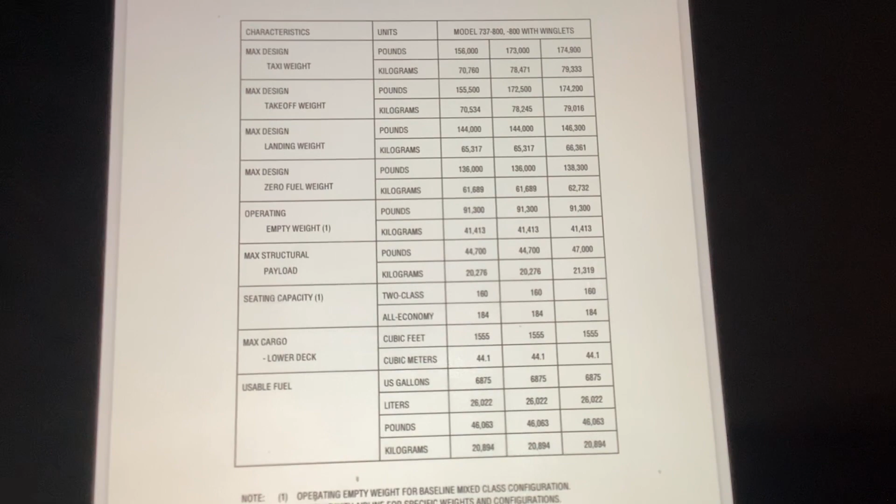So very simply, these are some tables with the given weights. If you notice, some of the 737-800 models in general terms are under the 160,000 pound limit. So I would argue it's even necessary to find out the specific models, in this case Avelo Airlines may be operating different versions of the 800 model and 700 model.

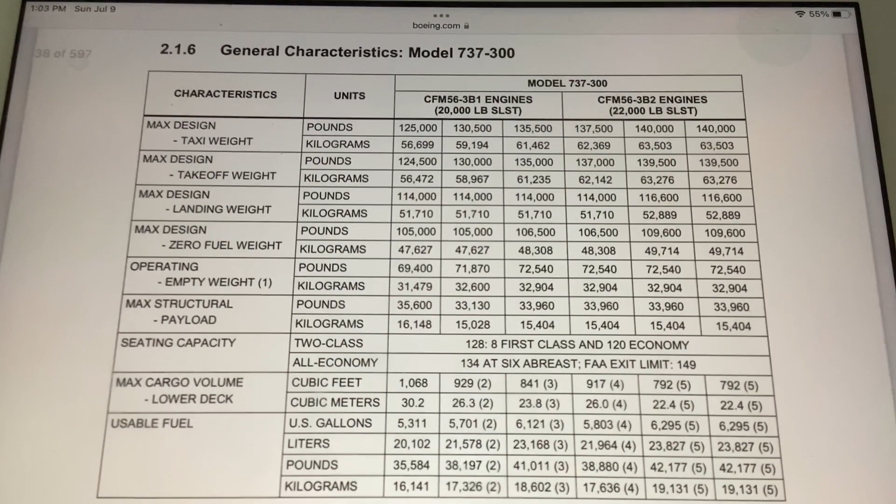It's very detailed, but generally speaking, these are the numbers we're working with. This is a throwback to yesteryear with the older 737-300 aircraft, and again you can see it ranges from 125,000 to 140,000 pounds. The 737-500, same issue, from as low as 116 to 136.5. Depends on many factors as the airplane is built.

We're almost done, everyone. That's what's good about the pause button. Since we're an hour into this, you have the luxury of the pause button. I do not, so I'm going to continue onward.

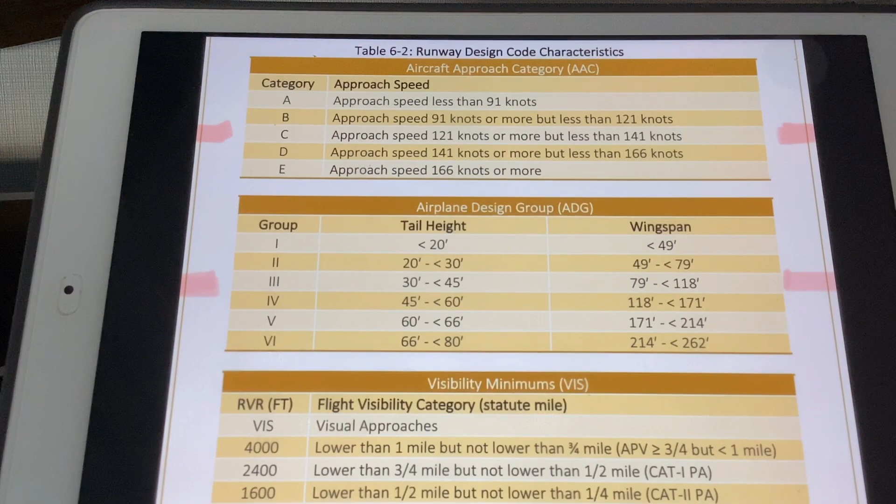We've talked about the runway. We've talked about the approach category. We've talked about visibility to a lesser degree. We've talked about crash, fire, rescue. Now we're going to talk about, great, you've landed the airplane. What about being able to operate it? Some might think there was an incident where an aircraft had a taxiway excursion, and that might be an indicator to some that the airplane is too big for the airport. Well, we're going to look into exact numbers that dictate otherwise.

All of what I'm going to share with you is listed as follows, and I just realized this is from previous, but this is a good review. We have aircraft approach category, airplane design group, and the visibility minimums. These are what go into the runway design code, or RDC, as a review.

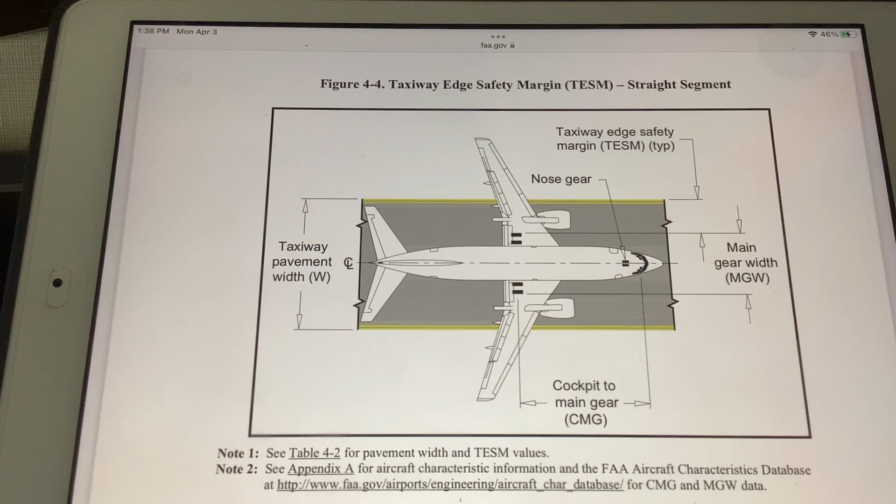So, taxiways, this is what I wanted to get at. Is that airplane too big for the taxiways? Well, the very simple answer is no, and we're going to see why. What these pictures and diagrams show are not specific numbers, but things that are considered. You have an aircraft taxiing on a taxiway. It is normal, it is acceptable, it is common for the wings of an aircraft to extend beyond the width of a taxiway. That is not a violation, that is not an oddity, and it would frankly be impossible to build many airports if that were not the norm. So first of all, it is normal for an airplane wingspan to exceed the width of a taxiway. 100%. Everyone in the airport engineering world and planning will tell you that.

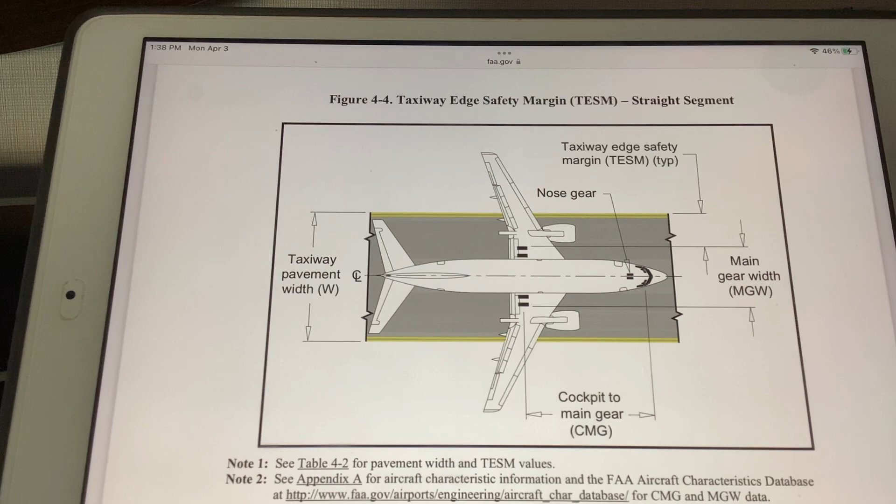They make object-free areas. What they're going to be concerned about is not necessarily just the width of the taxiway, but the areas adjacent to these buffers. Are they clear? Additionally, when considering the width of a taxiway as appropriate or not, it is the width between the main landing gear, one another, and the distance between the nose landing gear and the main landing gear that are considered. We have issues of maneuverability with the aircraft, and so standards have to be met in that way. But those are the considerations in reality that factor in. It's not because the airplane's wings extend past the taxiway edges that it indicates inappropriateness. There are other factors that are considered.

So those first factors are object-free areas, which we'll look at. They're buffer zones at the edge of the taxiway. Obviously you don't want to have structures, although you are allowed certain structures in these buffer areas, but they have to meet their own standards. Those buffer areas have to be cleared. The width of the taxiway is important, but what's important, and we'll use a round number, is the distance between main landing gear on a 737 category airplane, generally 20 feet. And I will show you in a moment, every single taxiway at Tweed is 50 feet or greater. 50 feet is the standard for most taxiways, whereas many of them, even at Tweed, are greater than 50 feet. No taxiway at Tweed is less than 50 feet wide.

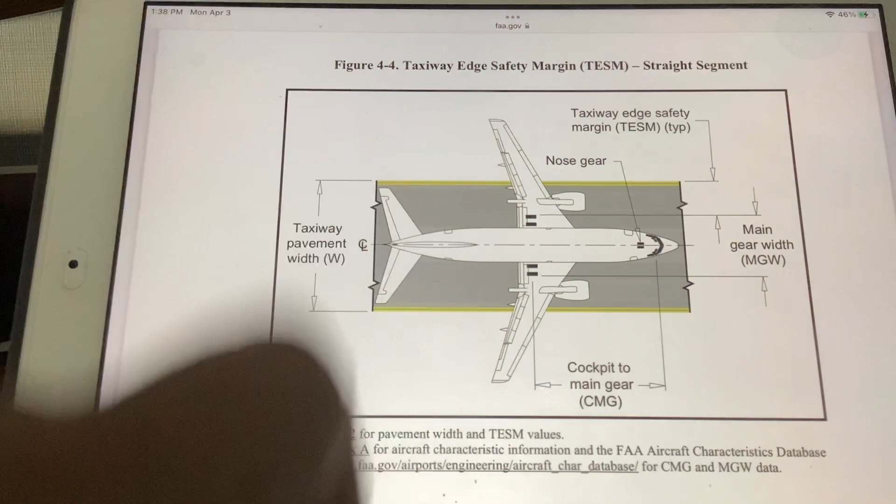Some of them are close to 100 feet wide, and we'll see in a moment. So the width of the taxiway, when it considers the main landing gear distance, one wheelbase to the other, is appropriate, and we'll see shortly.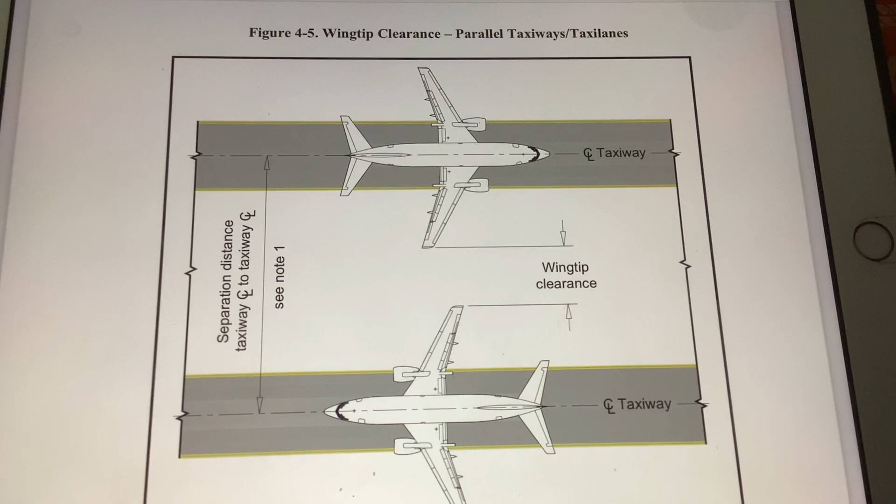So this, when it comes to taxiways, becomes an issue. I can tell you hundreds of airports that I've been to have notations to pilots stating that if your wingspan is greater than a particular width, you are not permitted to use the taxiway. These are known, accepted issues and operational limitations, along with amended procedures to accommodate them at airports across this country. Pilots, air traffic controllers, airport managers, and operations personnel not only know these, but they're not the ones who set the restrictions in place, because somebody has reviewed these various possibilities and set forth the restriction. That entity would be the FAA.

Then you have areas where you have parking areas, for example, and an airplane taxiing on the ramp behind parked aircraft. So again, you want to assure proper clearance, and that's where wingspan would be a consideration. Wingspan is a consideration with taxiway design and the designation of a group, but that doesn't mean the wingspan has to be less than or equal to the width of the taxiway.

This is a project recently completed, right off the FAA website. Basically, the new taxiway was offset to meet a new design standard put out by the FAA. I'll reference that shortly, and it'll be a further discussion in the future. But I just wanted to show you this happens to be Taxiway Alpha. This is Robinson Aviation, this is the control tower, and this is the west side where the passenger terminal currently is located. This taxiway is a new or relocated taxiway that is now 400 feet from the runway.

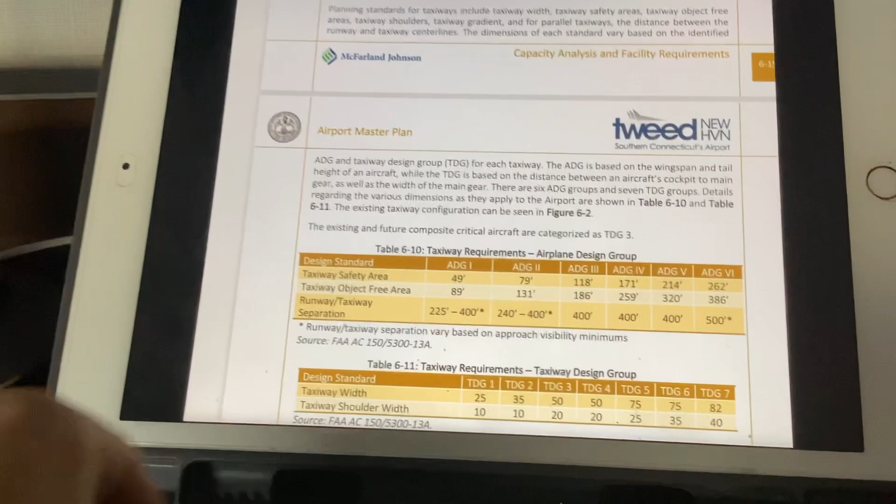Here we have a table from the airport master plan, which is simply a regurgitation of the advisory circular. We'll focus our area on aircraft design group 3.

The taxiway safety area has to be 118 feet. The object-free area has to be 186 feet. The runway taxiway separation has to be 400 feet. Then taxiway width is 50 feet, and the shoulder width has to be 20 feet.

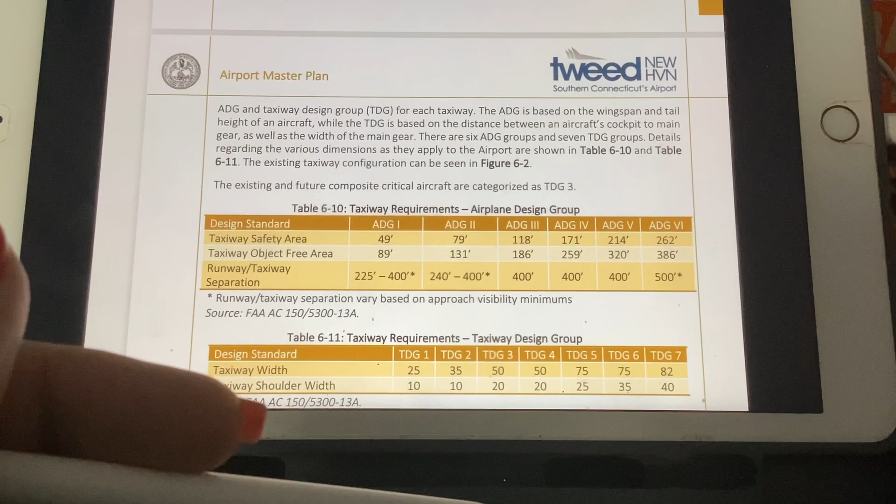A shoulder could be another paved area, not approved for use, just a paved area, or it could be a grass area, and it can be considered within the object-free area. So with a taxiway 50 feet wide, you have to have an area of 186 feet free of objects, and we do.

The 400 feet is something we have to talk about because in certain circumstances we don't meet that standard, and that's why I showed you earlier why airports are permitted what you might call non-compliance with the new safety standard. The original safety standard was 275 feet.

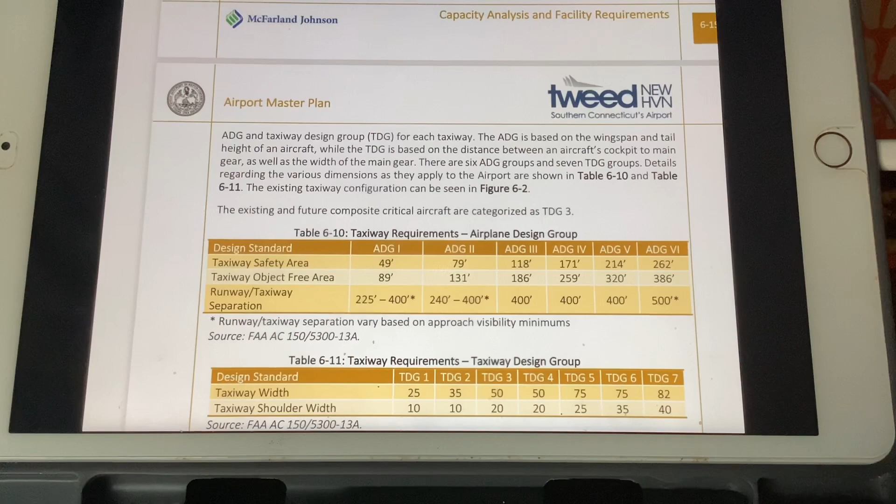We meet that original standard. The new standard is 400 feet. Not in all cases do we meet that in certain portions of the airport. As a result, the airport may impose limitations on combinations of aircraft at any given time. That would not be uncommon; it happens at other airports. I'm not saying it happens at Tweed, because the situation is variable, which we'll talk about.

These are descriptions from the airport master plan. I have the areas of interest. Taxiway Alpha is 50 feet wide. I just showed you Taxiway Alpha. This no longer applies because it's now been rebuilt.

So it is 400 feet for most of it. They have to do one other phase. Taxiway Alpha is 400 feet from runway 2-20 and meets the latest design standard set forth by the FAA.

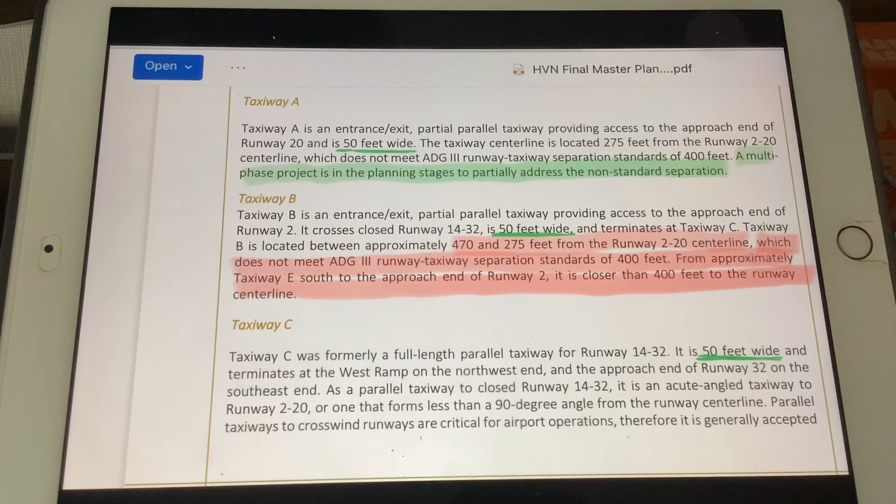Taxiway Bravo, this taxiway, you can see it's angular in nature, and therefore its distance from the runway is variable. It varies, as listed by the Airport Master Plan, from anywhere between 470 to 275 feet from the runway center line, which does not meet ADG, Aircraft Design Group 3, runway taxiway separation standards of 400 feet. But in some areas it exceeds, and in some areas it does not.

From approximately Taxiway Echo South, which is here, it's less than 400 feet. So that's where the variation is.

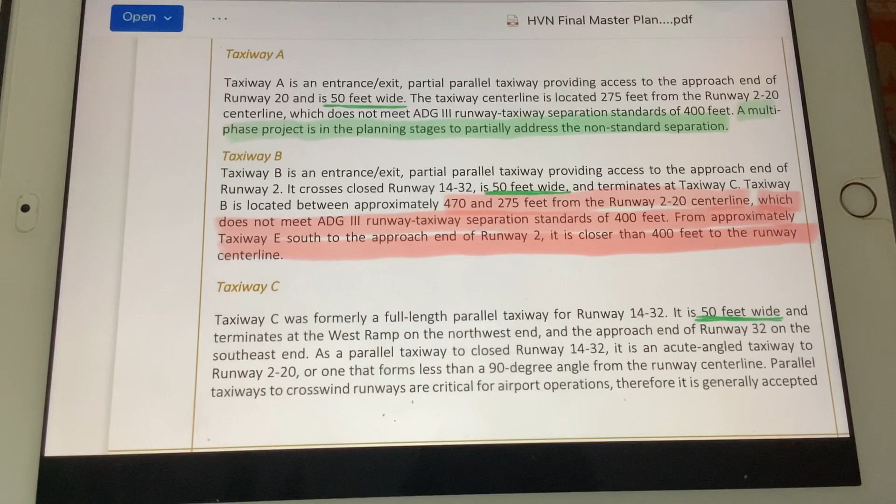This is where it's important to note it does not mean impending disaster. It does not mean we're operating in violation. It means we've not met the new safety standard imposed by the FAA, which could have been as recently as about 5 years ago.

That's why I started off with documentation that has literature supporting the compliance process and the reasons why an airport may not be able to comply. The FAA does not just change standards overnight and render other airports dysfunctional and shut them down. It allows time and circumstances to amend or modify the airport to meet that standard, but that doesn't always happen, and there are reasons why.

So Taxiway Bravo does not meet ADG 3 criteria because it varies in distance from 470 to 275 feet separation from the runway. This again does not mean that airplanes are going to hit one another wingtip to wingtip. It means the standard that now has been imposed is not met.

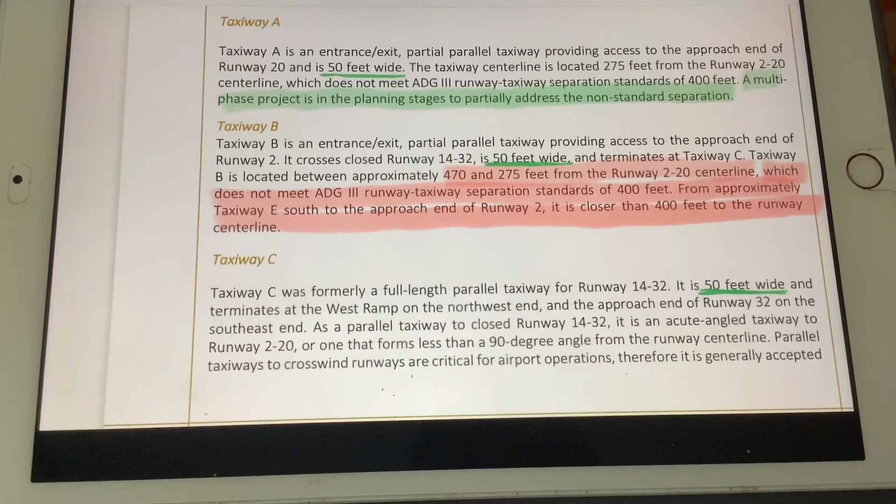The 275-foot requirement is met, and as I said, the wingspan of a 737 is fully encompassed in the runway width. So as long as the airplane is on center line, they will not hit, and even if there's room for variation, namely if the airplane is off the center line, there is still assurance it will not hit another airplane wingtip to wingtip. That's a big idea that may take some time to digest and require further explanation, but very simply, that distance is from 275 to 400 feet.

Then Taxiway Charlie is 50 feet wide. It doesn't need to reference the 400 feet because it's not parallel to anything.

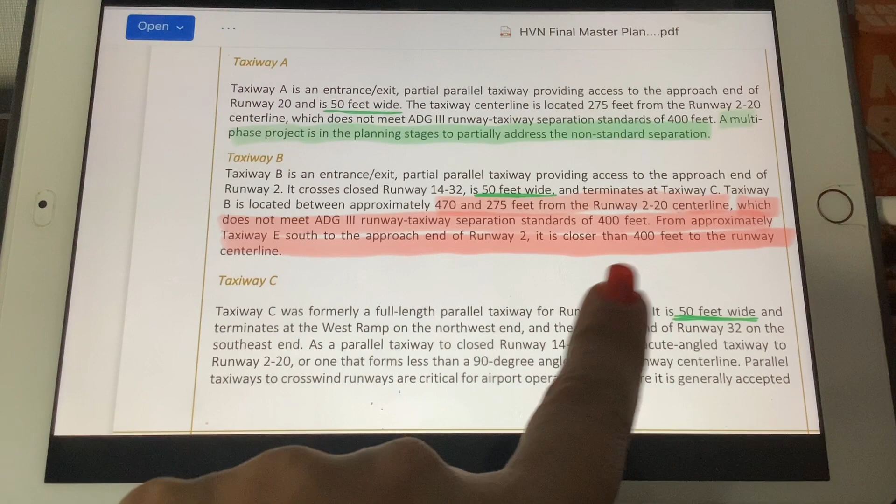Taxiway Delta is 50 feet wide. Taxiway Echo is 80 feet wide. Taxiway Foxtrot is from 50 to 90 feet. Taxiway Juliet is 75 feet. Taxiway Hotel is permanently closed. Taxiway Gulf is not used by Avelo jets; it's on the east ramp and will not be used when the new terminal, if it is built. But that said, it's still 50 feet wide.

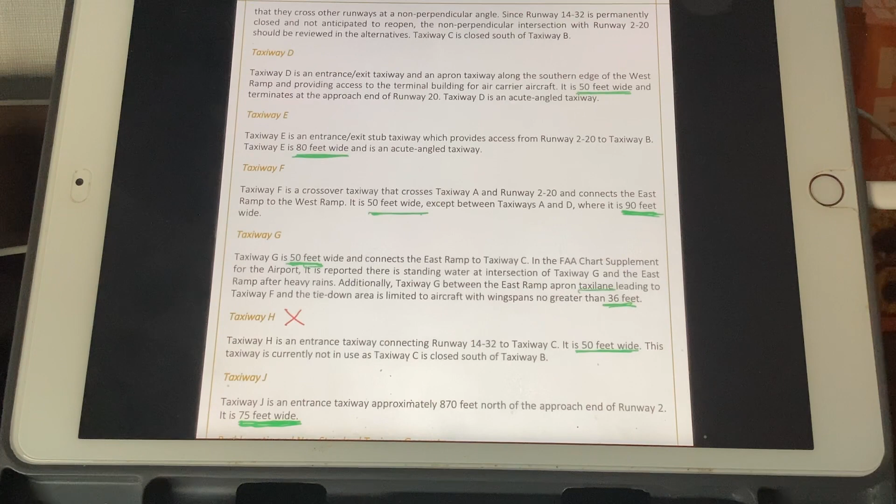These particular taxiways do not need to meet the 400-foot separation standard as they are not parallel taxiways to the runway. I'll say that again: Delta, Echo, Foxtrot, Gulf, and Juliet, for a range of reasons, primarily being non-parallel taxiways to the runway, do not apply the 400-foot separation standard.

As far as width goes, and as far as object-free areas, shoulders, and buffers, they meet Aircraft Design or Taxiway Design Group, TDG, Group 3.

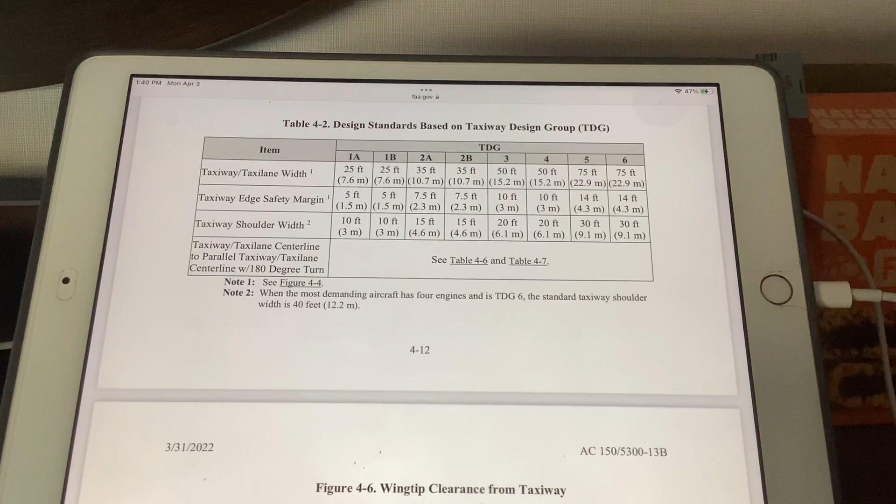I'll also say the website I referenced early in this presentation has, I believe, the most current standards, because they've even changed some of what's published here. They've made them less restrictive, and there's logic why. If you reference that website, it gives you what I believe to be the best and most recent standards being applied, which may be slightly different from these numbers here.

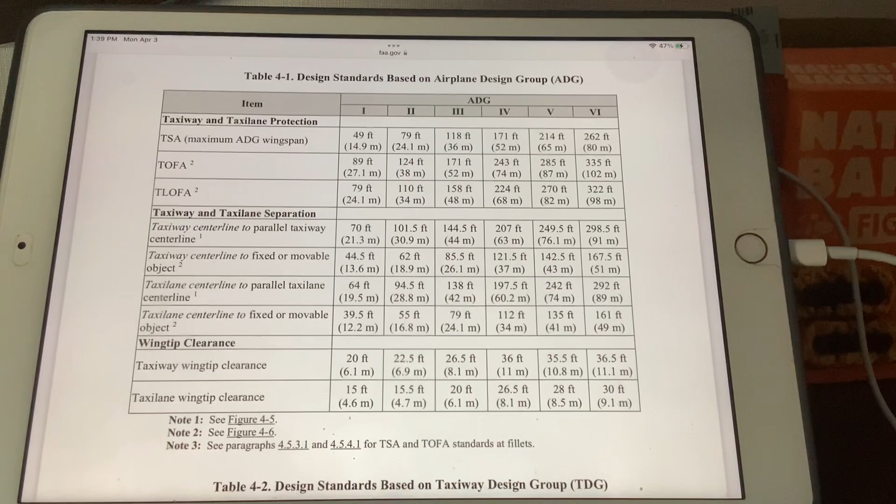Again, here's a table, you can pause this. We are Aircraft Design Group 3. These are basically different combinations of airport surfaces in relation to one another. That's a way of saying a taxiway or runway's proximity to other features of the airport, such as other taxiways and runways. So this applies.

How far is a taxiway from another taxiway? How far is a taxiway from a runway? How far is a taxiway from a taxi lane, etc. Here's just a rough, non-scientific measurement of what I'm trying to talk about.

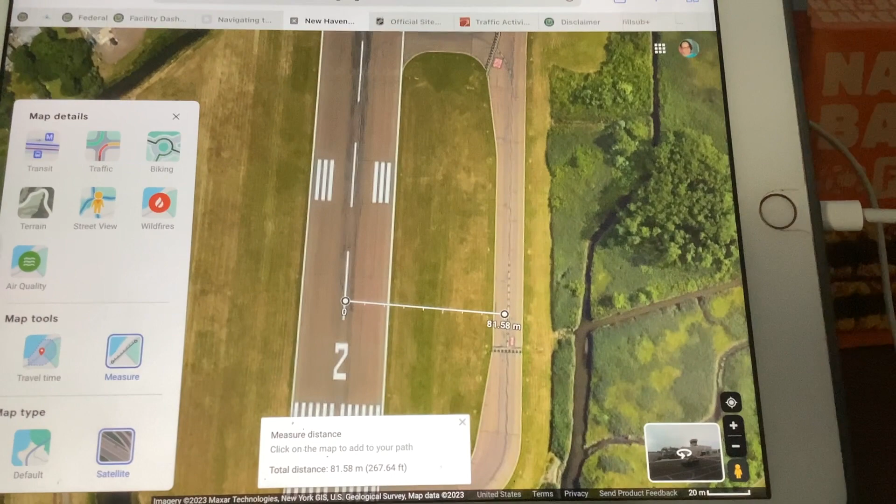Imagine an airplane with a 120-foot wingspan, well within the confines of the runway, could never hit the wing of another airplane. Just because the wings go over the taxiway edge does not mean it's an inappropriate taxiway. In fact, most taxiways you'll find to be the case.

This is taxiway Bravo, for example. You essentially could never have the wingtip of an airplane, a 737, which would clearly be over the edge, come into contact with another airplane of the same size on the runway. It's essentially guaranteed. That is the design standard upheld by this separation.

So again, you have the entirety of this airplane, the entire footprint, within the width of the runway. It is a physical impossibility for it to come into contact with another airplane. But those are indeed factors and considerations given at an airport when it comes to critical aircraft classification. They are in fact looking at these very issues.

That is what airport engineers and airport planners are for. That is what survey teams are for. This is not about a rogue statement made by certain individuals with no substance whatsoever, no literature to back it up—pure mythology promulgated by bias.